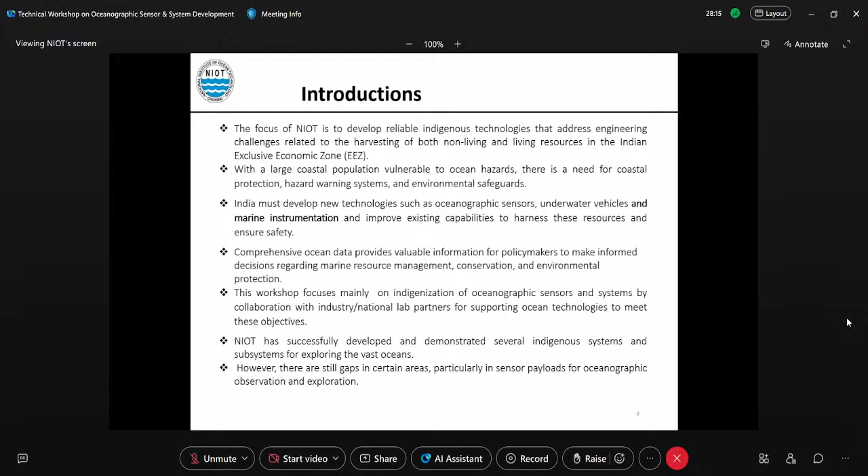NIOT has got a group called Ocean Observation System. The mandate of this group is to operate, maintain, and mount buoy observation networks, and also maintain the related telecommunication facilities in the Indian seas. This group has a network of moored buoys in the Indian Ocean around the Indian coast.

This group also, for operation and maintenance, works to develop facility for calibration and maintenance of the sensors in-house.

To support this group, we have a technical group. One is the Ocean Electronics Group. This group helps in indigenization of some deep ocean observing sensors, for instance Argo and AUPD, Autonomous Underwater Profiling Drifter, and so on.

And one more group we have is called Marine Sensor System. This group fully concentrates on development of underwater acoustic transducers and systems.

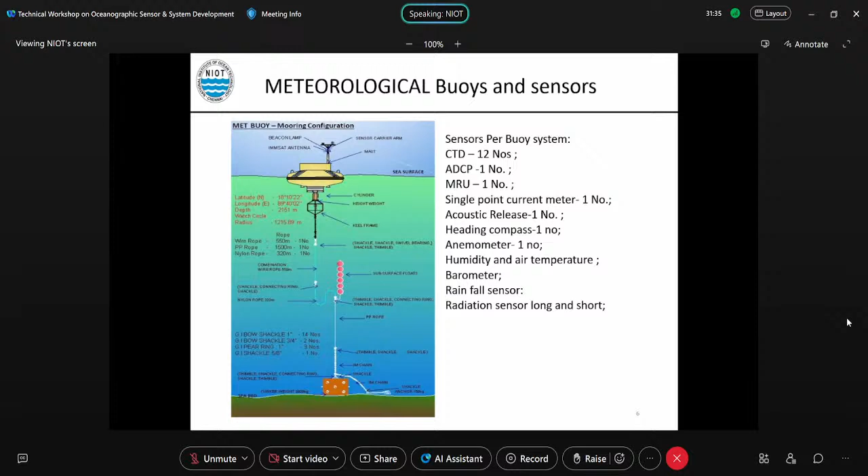Each buoy houses sensors valued at more than 3 crores. It has an anemometer, heading compass, humidity and air temperature sensor, barometer, rainfall sensor, and radiation sensor for long and short wave measurement.

We have another buoy called the Omni buoy. This buoy houses sensors for atmosphere as well as underwater, even below 500 meters depth, up to the mooring point. So in addition to meteorological data, it has CTD sensors and ADCP, Acoustic Doppler Current Profiler.

The third one is the Tsunami buoy. This buoy houses a bottom pressure recorder, and that pressure measurement is transmitted to the buoy through an acoustic link - that is, an acoustic modem collects this information and transmits the data to shore station through satellite. So this information can be immediately passed on to institutes like INCOIS for advanced warning.

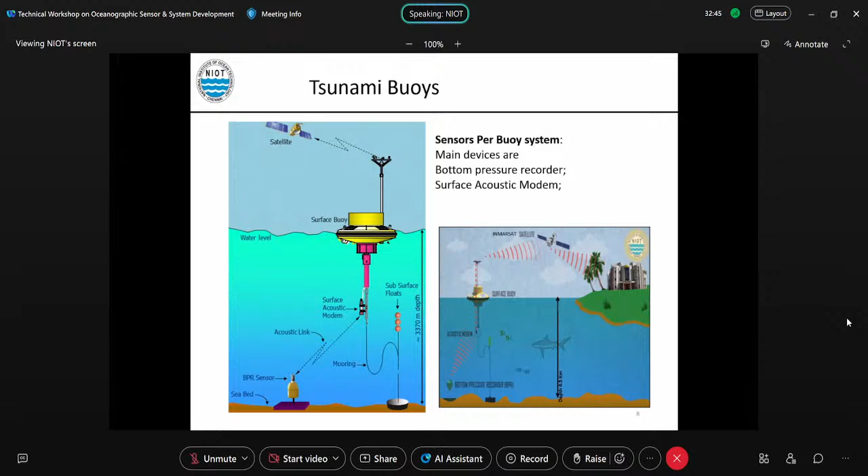Another group we have is the Marine Sensor System. This group mainly focuses on design and development of indigenous acoustic transducers and systems.

Earlier, we successfully developed an underwater acoustic transmitter of wide band and low frequency, and we got a patent for this. We also developed a hydrophone array in the same frequency range.

With this system, we developed a sub-bottom profiler designed for shallow water application. It houses the transmitter, hydrophone, and all the electronic hardware on the surface float, and we had a deck unit for real-time observation of the picture that the sonar captures from the seabed.

We have demonstrated the successful working of the system, and it is capable of penetrating up to 3 meters. We also signed a TLA, tripartite license agreement, with BEL for transfer of this technology recently. Thank you.

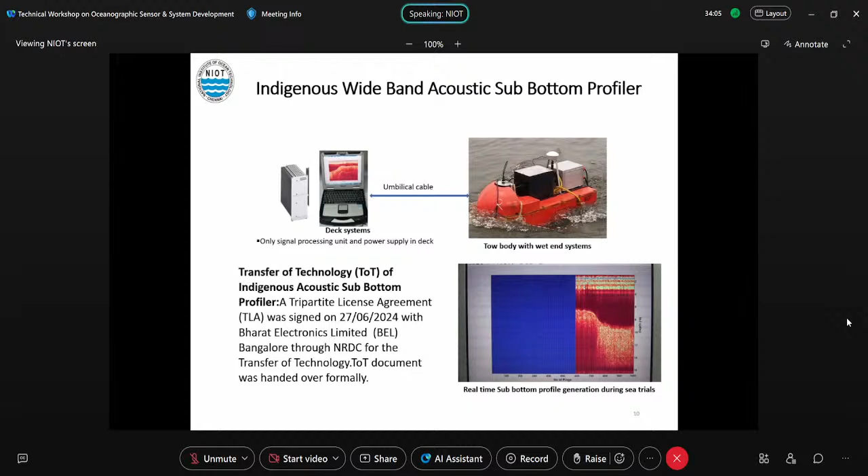This is the view of the seabed strata captured by our subbottom profiler. We manually buried some steel items in the fishing harbor channel that we could capture with the help of our subbottom profiler.

We also took our subbottom profiler across the fishing harbor channel, and we could measure the width and depth of the channel, and also see the depth of penetration in the mouth area.

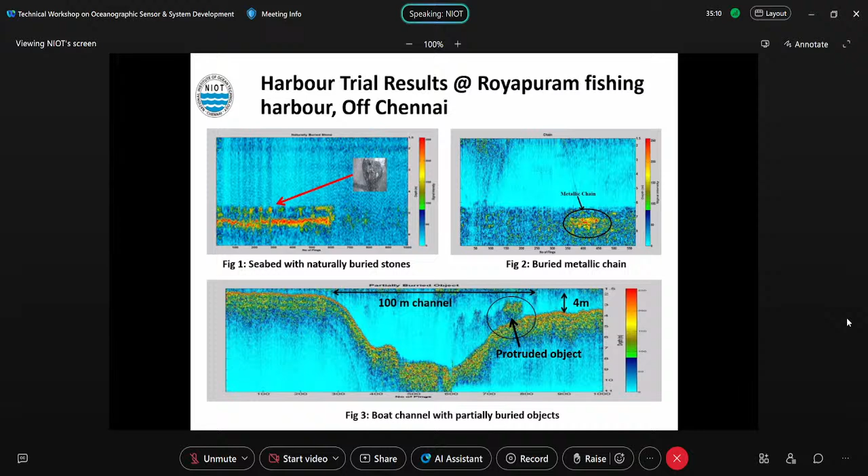Another successful product we have developed is the underwater acoustic telephone. This is being developed for manned submersibles. We have successfully demonstrated the working of the system up to 500 meters off the Bay of Bengal, and we are working further to enhance its capability beyond 500 meters, up to 6,000 meters and beyond, for manned submersibles.

We also help private industry with design and fabrication of transducers. We recently got one project for fabrication of a transducer for underwater acoustic wake seeking and homing system of torpedo for the Indian Navy.

This transducer we designed and fabricated, and we have done complete acoustic characterization and pressure testing at NIOT. We have handed it over to the firm for RC acceptance test.

So we have another 5 minutes.

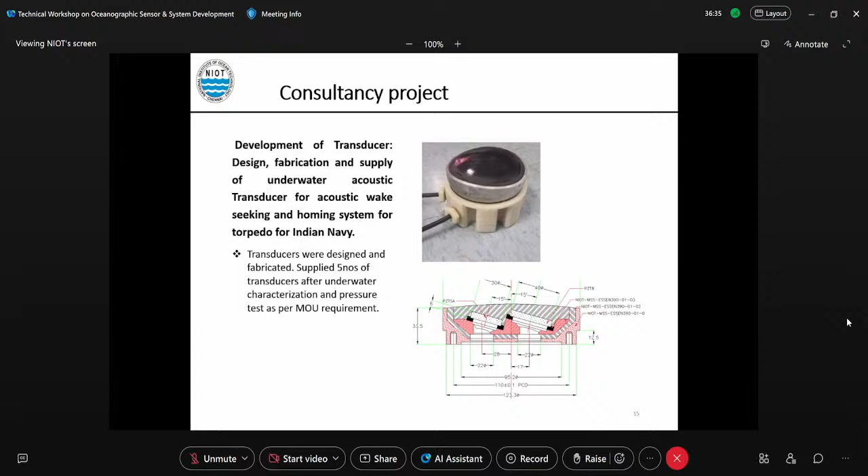We have another group, the Ocean Electronics Group. This group mainly focuses on development of deep ocean observation systems like ARGO and AUPD, Autonomous Underwater Profiler Drifter.

Whereas this water sampler has an electronic system and a pressure sensor, and from the deck we can remotely operate the solenoid valve to close the lid and collect water at the exact depth of immersion.

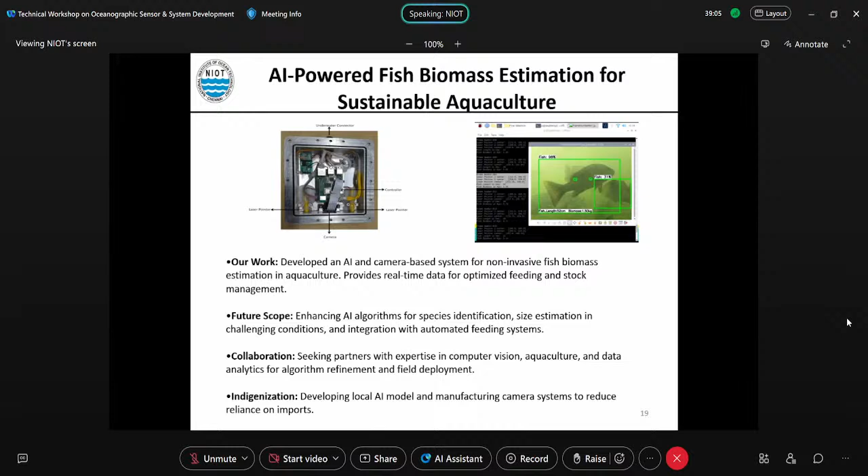This may also require changing the type of net to match various species of fish, so industrial collaboration may be required to improve and modify this fish cage system.

One of the main sensors we use for ocean observation is CTD. Usually we import this CTD sensor from Sea-Bird Electronics.

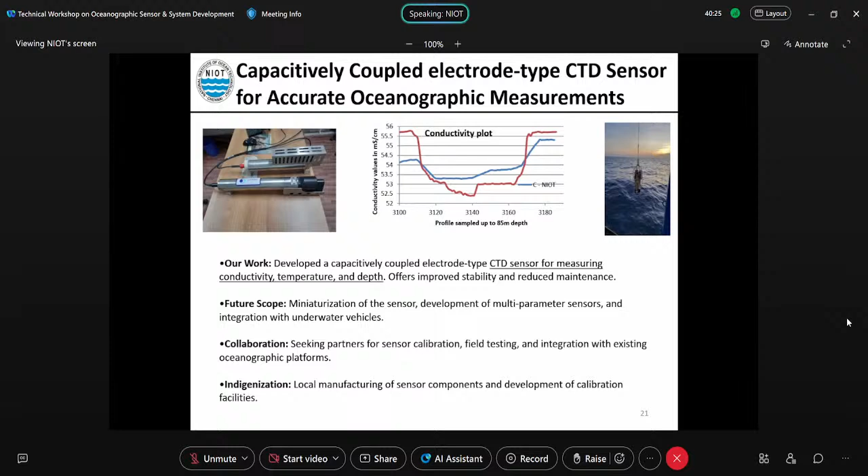We have been developing these sensors in collaboration with IIT and other institutes, and we have compared the data measured using the imported sensor and the locally made one. There are some differences, so fine-tuning work is still going on in the development of this product.

This is a low-cost CTD profiler that doesn't require the vessel to stop and operate a winch to lower it and get CTD data. This sensor can simply be thrown into the ocean, and it submerges up to a set depth, at which point a dead weight is deployed.

The dead weight will be de-linked, and once de-linked, the sensor will pop back up to the surface. During the transit, it measures all the CTD data.

Another product we have developed, under development, is AUPD, Autonomous Underwater Profiling Drifter. Once we deploy it in the sea, it moves based on the direction and speed of the ocean current, traveling from surface to deep, maybe up to 4,000 meters. During this movement, it can measure ocean parameters like conductivity, temperature, pressure, density, and salinity. The battery can support a maximum of 180 cycles, and once the AUPD comes to the surface, the data is transferred to shore stations.

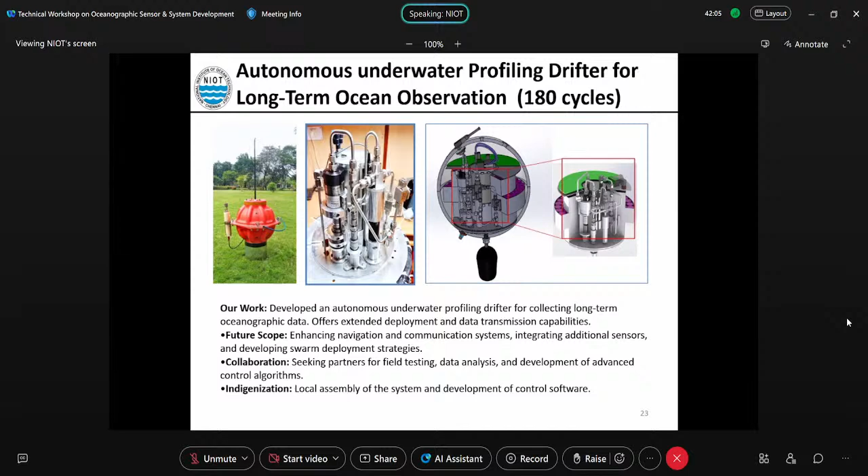We also have another product called Sea Profiler. While the ship is moving from one point to another, during the movement we can collect CTD data by connecting this to a hydrographic winch. This profiling goes from surface to deep, and the depth depends on the speed of the vessel and the speed of paying in and payout of the hydrographic winch. Based on that, we can get a profile of the CTD with this small CTD profiler.

Okay, quickly finish.

There are many sensors we have identified that are required for development of all these products. I have listed out sensors 1 to 7, required for development of the fish cage: CO2 sensor, chlorophyll sensor, dissolved oxygen sensor, arsenic sensor. There are also many other sensors like SST sensor and nitrogen dioxide sensor. We also need development of hydrophones and transmitters for underwater acoustic communication and imaging. There are so many sensors listed that require indigenization.

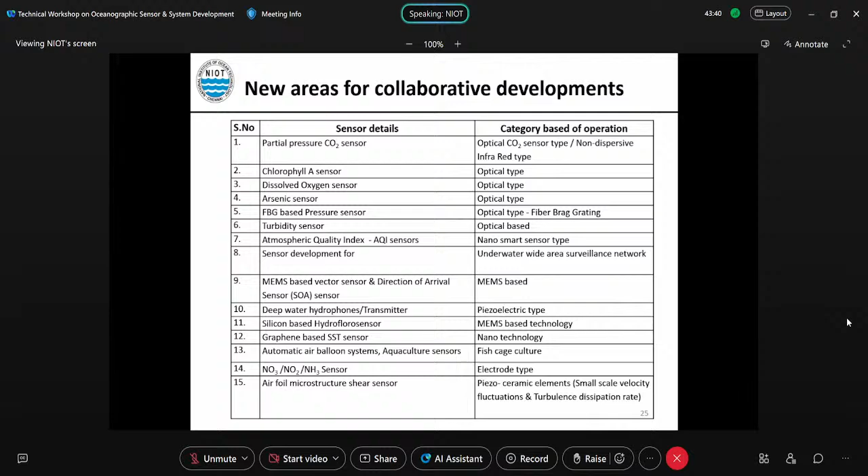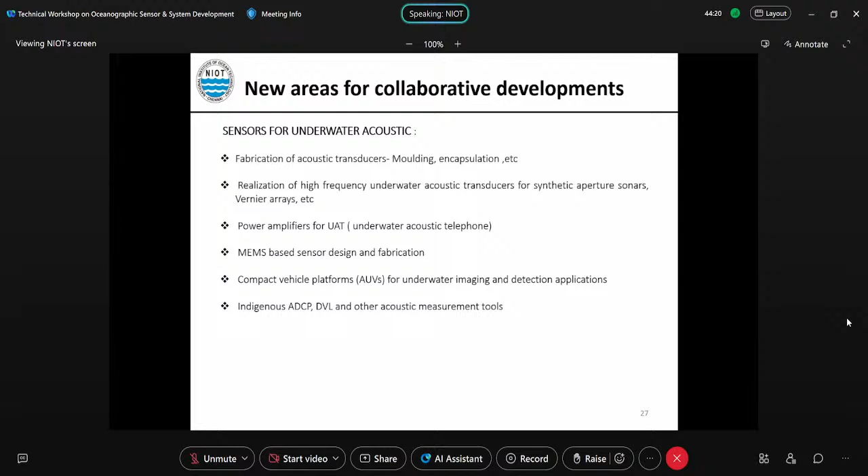These are the sensors we use for an ocean observation system. We have given complete details for the make, model, resolution, accuracy, range, and type of sensors. For the acoustic related area, we need industrial support for development of sensors like transmitters and hydrophones, requiring industry support for fabrication. For our underwater acoustic telephone, we need power amplifier development, and also development of ADCP, the acoustic Doppler current profiler. We need industry support to develop these products.

We have a facility at NIOT to support industry, since the facility may not be available everywhere. Some of the facilities we have at NIOT include research vessels to take the product to sea and test and validate it. We also have lab facilities such as an acoustic test facility, hyperbaric pressure test facility, environmental chamber, and a shaker system for shock and vibrations.

This is a view of the hyperbaric test facility. This facility helps test the product within the campus, eliminating the need to take the product to the sea and deploy it in deeper water. So within the campus, we can see whether the product developed is capable of withstanding the external hydrostatic pressure.

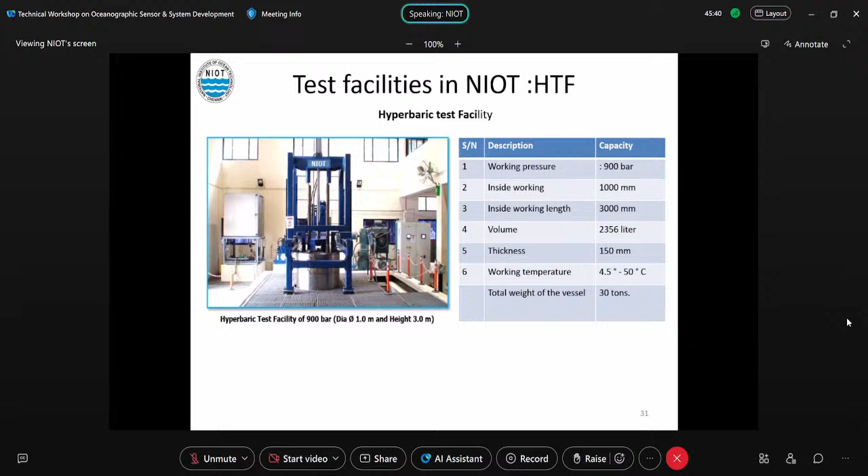We also have a corrosion testing chamber. This is to test the material's capability to withstand corrosion resistance in the marine environment.

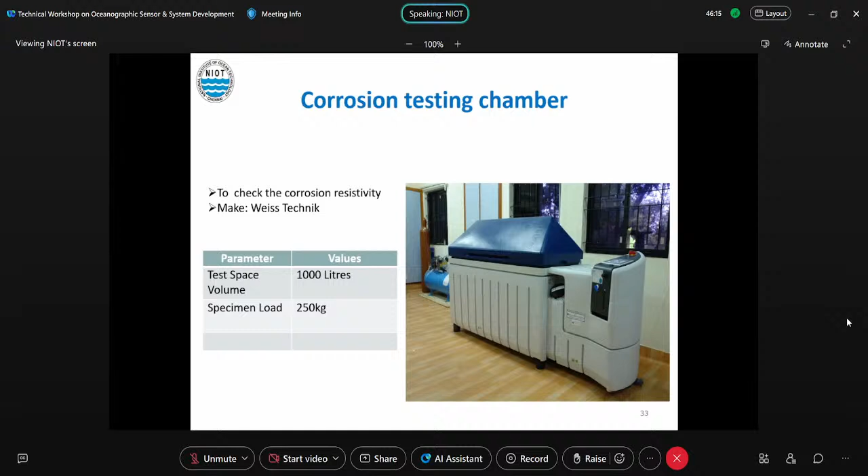So why do we need this indigenization? I have listed out a few points. One main thing is the cost of sensors imported for one buoy is about rupees 3 crores, and these sensors are very expensive with a long procurement and repair lead time. They often require recalibration at the OEM facility at specific intervals determined by the manufacturer, and the lead time for re-export and recalibration is also lengthy.

Therefore, efforts must focus on indigenization of these sensors and establishing a calibration facility that meets international standards. Thereby, we can achieve self-reliance by developing and producing sensors within the country, reducing dependence on foreign imports, boosting domestic industries, and creating employment opportunities.

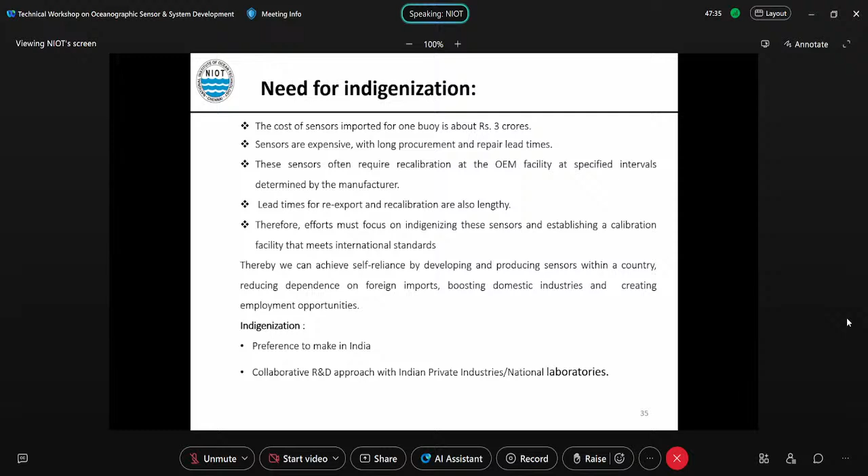This is possible since the government supports Make in India, and this can also be done through research-based collaboration; with a research-based approach we can develop these within the country.

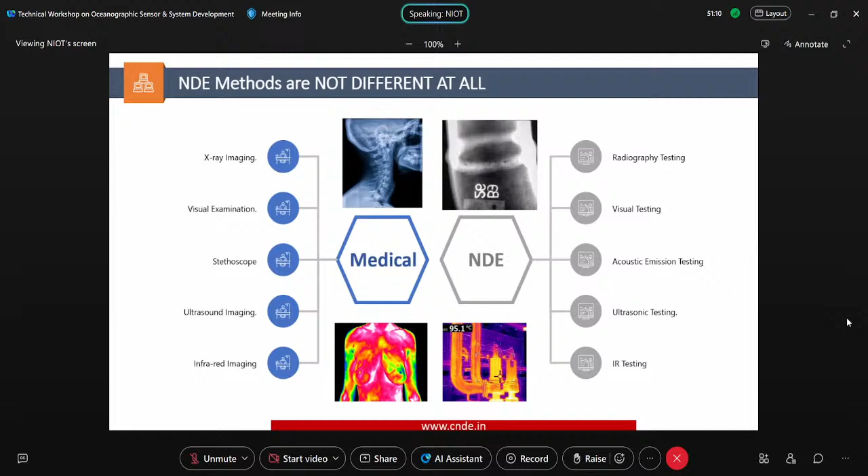Okay, so basically, NDT is something that you need because no material is manufactured perfectly. We live in an imperfect world. So no material is manufactured perfectly, no structure is manufactured perfectly. And even if you do a good job, the material doesn't stay the same, just the way human bodies do not stay the same. So just like in the human body, whether during manufacturing, production, or post-production when it's being used, you need to make sure that everything is intact and all right. And how do you do that? You do that very similar to what you do with medical. In medical, if I am not all right, I go get myself X-rayed, I get an ultrasound, an MRI. These are technologies that are used. We use identically the same technologies. Only difference is that we are probing inside material structures that are not living, and that's a major difference.

But there's a much bigger difference. Unlike human anatomy that has not changed in hundreds of years, unfortunately in the materials world, in the engineering world, materials change every year. Components and design change every year. Problem statements change every year. So by the time you are ready, and you have solved a problem, the problem has shifted. This is a huge challenge that we have.

The other big challenge is the fact that if you just talk in terms of, say, a ship, it has thousands and thousands of welds, and weld is one of the areas that we need to inspect very carefully. If you take railways, you're talking of 1 lakh kilometers of rails that I have to inspect every 3 months. Bridges, I don't have to keep going on this. So the volumes are very large, and in some cases the conditions are not very good. Underwater conditions, like this, are not as good as doing it on the ground. So that's a big challenge we also have. And finally, it's a very cost sensitive market, so you've got to do it cheaper.

So what we do at IIT Madras is we do deep research in this field. We look at how we can solve problems that are unsolved, and how we can take the physics, the mathematics, and the engineering and the technology to make things that we want to do better. We basically look at three major areas.

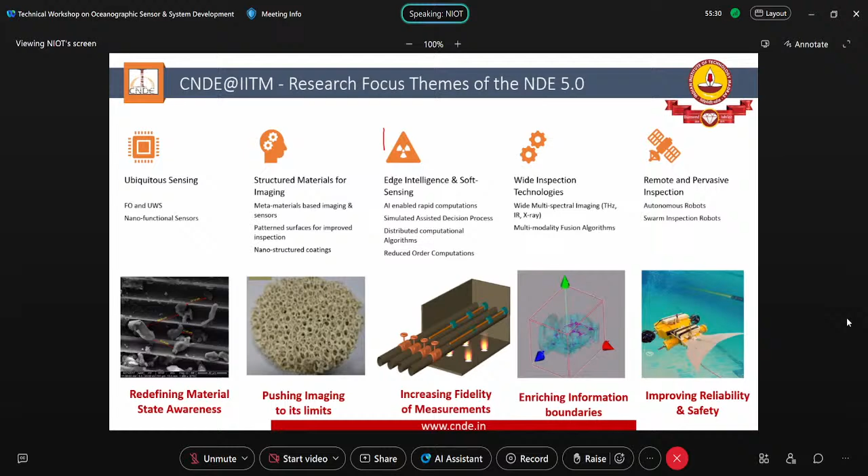And finally, we're looking at swarm robotics. Imagine you have thousands of these inspectors going around and taking data. So these are the areas that we are working on.

This is a part of my team. They're not the only team, but we have faculty from different departments working together. We do a little bit of work with the ocean department, but mostly materials, electrical, civil, and computer science also.

Extremely collaborative, we work very closely with many universities across. These are only universities which we have ongoing or recent student exchange programs, joint PhD programs, or joint funding that goes across the world. We are dependent heavily on our funding from the industry.

Whether it is manufacturing, aerospace, defense, transportation, or energy, we work very closely with the industry. And what's important is, because we work so closely with industry, it has allowed us to actually understand the problems, solve the problems, and more importantly, made sure that the problem we solved actually translates into a product—a made in India product, made not just for India but for the world. We have 13 companies that we have started in the last 15 years.

Just a small snapshot: these 13 companies are all located within 20 kilometers from this place, or even closer to IIT, and they employ about 1,200 people. That is more than what IIT employs.

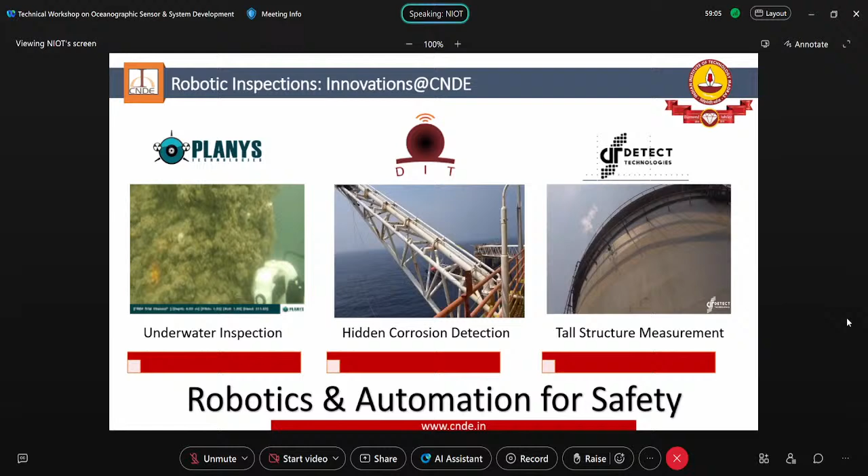Similarly, whether it is AI-based technologies for inspection—welcome to XYMA Analytics, where innovation meets industry needs. Today we introduce the UT Maps, a state-of-the-art sensor designed for precise temperature monitoring in reformer tubes. Our sensor is engineered for seamless integration into industrial furnaces, ensuring accurate and reliable temperature readings. Installing the UT Maps is straightforward, and our team ensures smooth integration with your existing furnace setup. Our technicians meticulously calibrate the sensor to meet your specific requirements, ensuring optimal performance right from the start.

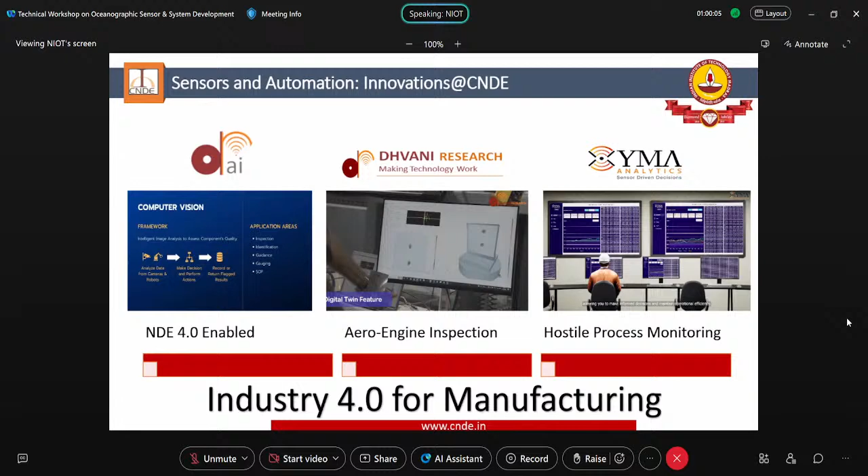Should temperatures approach or exceed the safety threshold, the UT Maps triggers an immediate alert. This alert system ensures swift action, minimizing risks and maximizing productivity in your industrial processes. Experience the power of real-time monitoring with the UT Maps. Contact us today to elevate your industrial operations to new heights.

Lovely, and then it is accepted and works every time. Whenever it's asked to work, it will work. In the lab, it will work only when the person is there, and then he will also have to do some soldering and tinkering to make it work. That is the difference, right? So that, and then of course, understanding the business perspective.

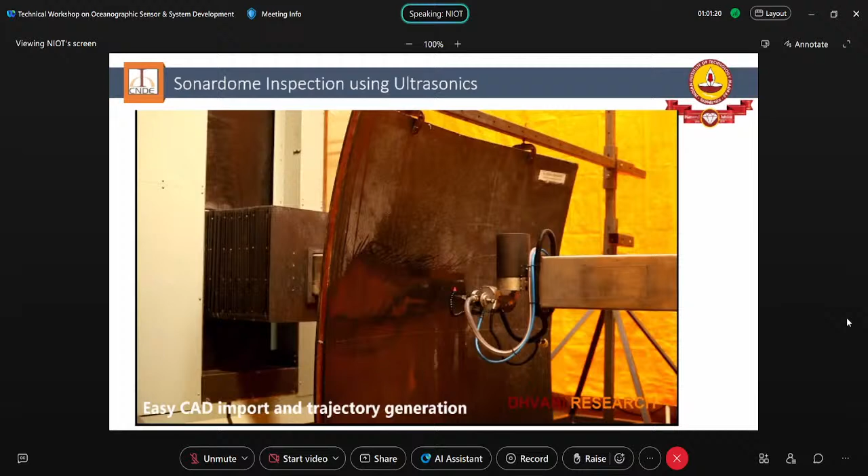Those are issues relevant to some of your things. For instance, Dhvani Research, located a few kilometers from here—let me show you. This is actually a sonar. It depends on this—this is the largest ever built. And the water section can be 6 meters, 3 meters by 4 meters. That will be the volume of material.

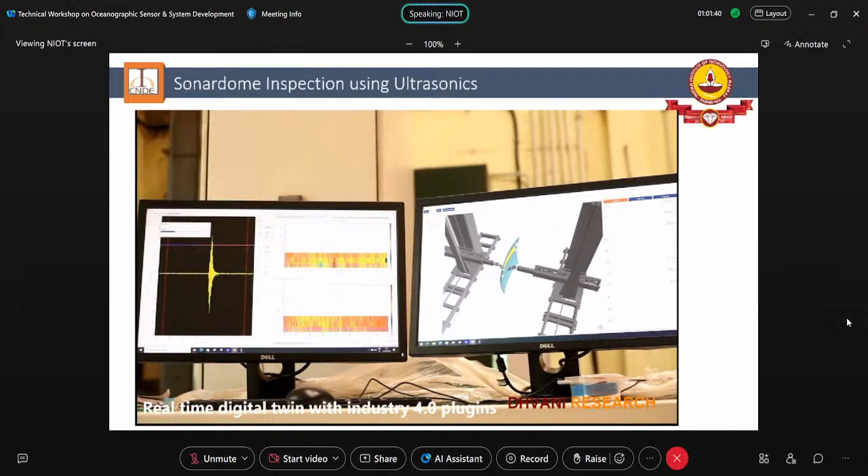It can be composite, so that is one section of the sonar dome, which covers the sonar under the ship. That is a much more complicated job than that. More importantly, what we are also providing, and nobody else is able to do, is a complete digital twin—whatever I do in the computer reflects reality, and whatever happens in reality comes back. That is a feature that didn't exist before we introduced it. Now others are doing it.

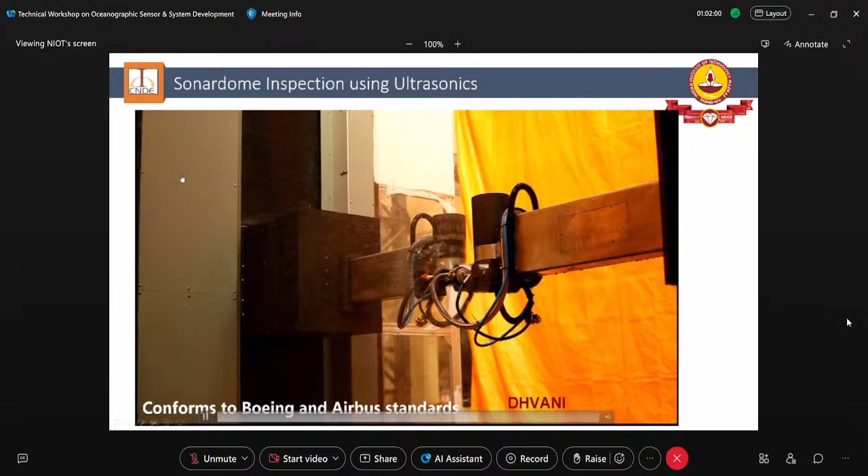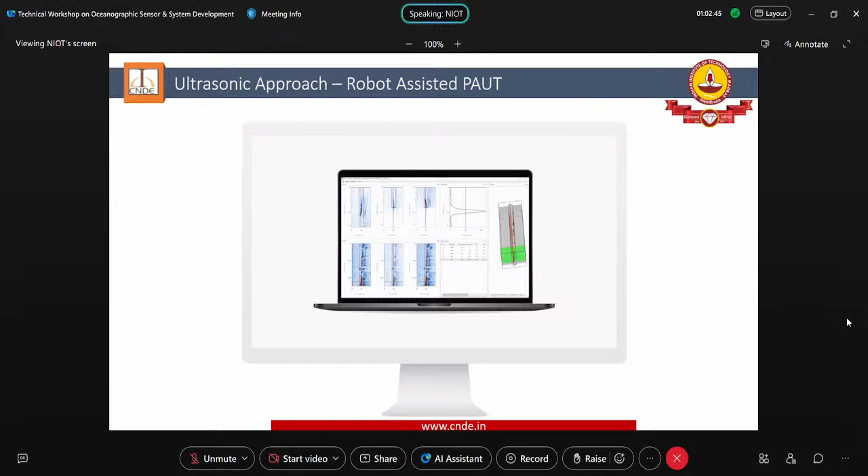Another example is work we did with Mazagon Docks initially. Today everybody, like L&T and Reliance, is trying to use this—weld inspection that is completely automated and robotized. Unlike a common situation where you need experts to look at inspection, we are able to get rid of that expertise and make very informed decisions using automation and AI. Today companies like L&T and shipbuilding companies are using our weld inspection hardware and software, with very limited requirement for the kind of expertise normally needed. So they can improve productivity and reliability.

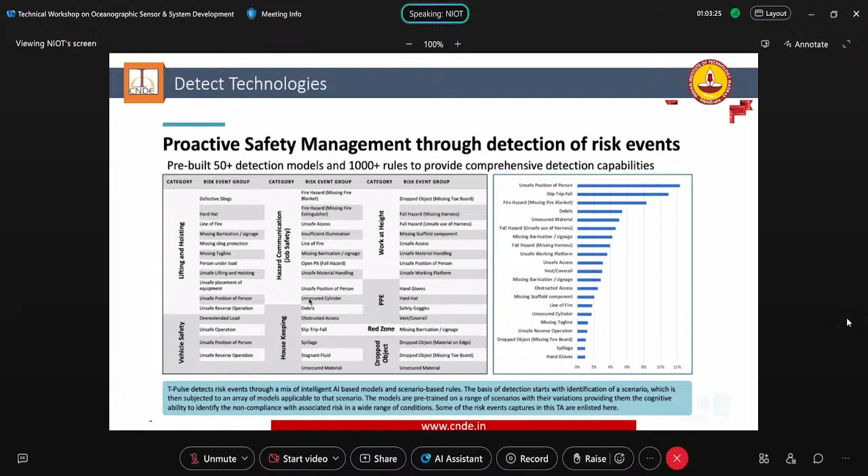Another company, Detect Technologies, today operates in several areas—this company alone constitutes 50% of the employment I talked about earlier. We employ about 600 people globally. They look at building intelligence into any manufacturing facility, wherein both compliance and safety are automated using AI. This just gives you a list of the various AI models they have that allow them to make places safer and more efficient.

Similarly, another company called Maximum Labs contributes an interesting ERP for shutdown periods, which makes processes more efficient during shutdown. And finally, a company called XYMA Analytics, which came out in 2020, looks at creating an IoT platform for hostile environments, particularly for marine environments. I want to just say this.

This is an example of providing complete monitoring of the engine, whether it's thermal mapping, vibration mapping, or oil quality - all continuously monitored. So an IoT platform for the engine room for marine is something we are now offering. They're commercially coming out with a couple of partners, user industry on the marine side, so you can monitor the engine and make sure it's being efficiently used.

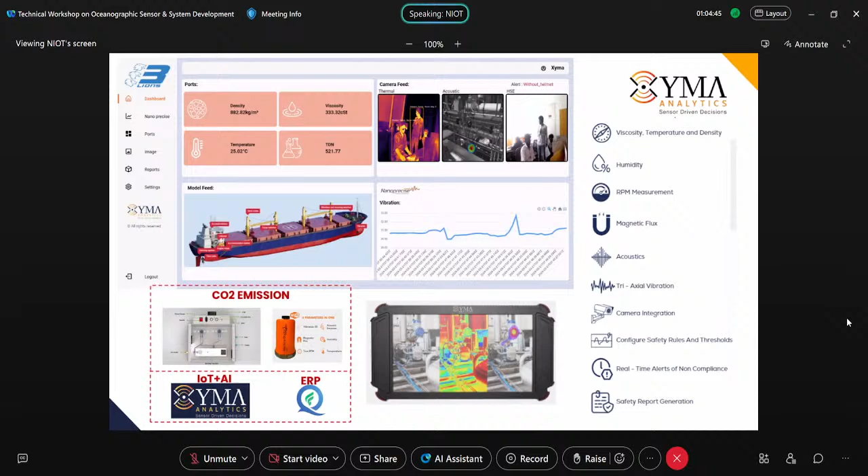Finally, last story - we are not just about engineering, we are also about social responsibility. One of our companies is using robotics to solve a couple of very important problems. One is the last mile water - your last mile pipeline is your biggest issue with water. Sometimes you open the tap and get brown colored water, and you don't know what is in it. So we are trying to look and see if we can fix that.

We're now operating in about 15 cities in India, trying to make sure that the water pipelines are safer. Just one example: in Hubli, about a year ago, after our intervention, 10,000 homes got clean water the next day, because we found exactly where the problem was.

Similarly, with septic tank cleaning, we are trying to solve the problem that you and I have made happen - the fact that you make people go into the septic tank. We have now completely robotized it, and there are quite a few changes we are making.

With that, I'll stop right now. I don't want to delay this, but thank you so much for the opportunity. The message is very simple: we have technologists, good researchers, amazing facilities, great ideas, no dearth of talent, no dearth of opportunity. How do we take that? How do you take what you have in your lab and make an impact?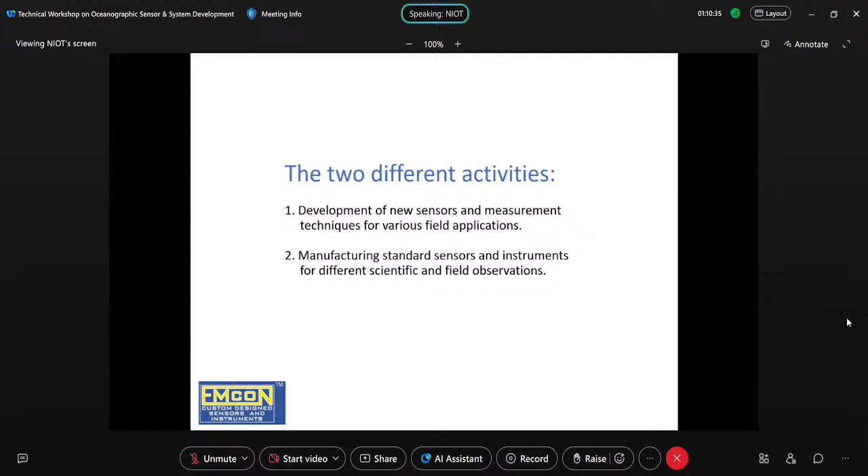These are the areas: agricultural science, post-harvest technology, marine science, ocean technology, fish processing, fishing technology, water resource management, dam safety, architectural and structural engineering, hydrodynamic model studies.

All our technology is fully indigenous, so we don't have to depend on any other foreign body. That is our core idea.

So when we design something, we understand the location and then we design accordingly. It's not just doing something and making sure it goes into any situation - it won't work like that. For each different type of situation, we have to design, find the range, find the type of product, find the type of material to be used, and a lot of other things.

Most of our products have been tested at FCRI Palakkad, IMD Pune, CWPRS Pune, IIT Chennai, STIC. This I am skipping because it may not be relevant.

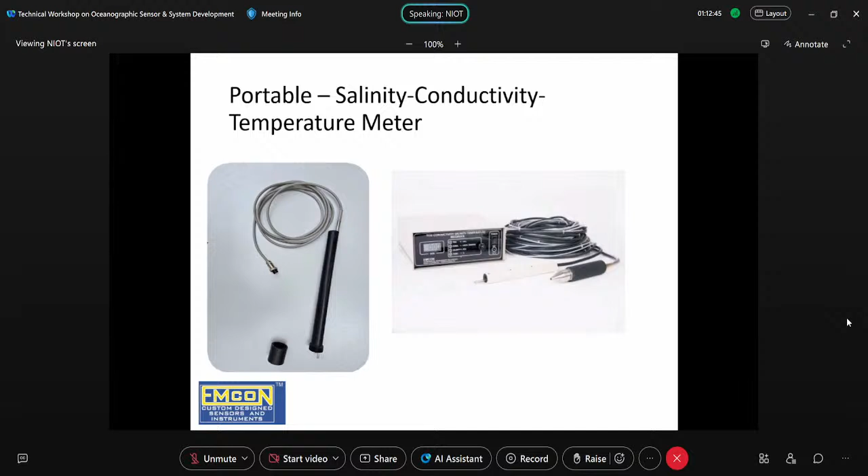Recently we have developed this for DRDO for their XBT probes, expendable temperature probes, and CTDs also. This is our most simple probe, which somebody can take and dip the sensor to the required water body and take measurements. This is a portable model. There are also other sensors connected to a handheld device for dissolved oxygen, ORP, conductivity, and temperature.

Now this is another work we have just started. We are planning to come out with a capacitance-based sensor for measuring conductivity, I mean salinity. We have done some initial tests and found very good results. There are a lot of further activities to be done, but it is a promising area. Using capacitance, we can directly measure salinity.

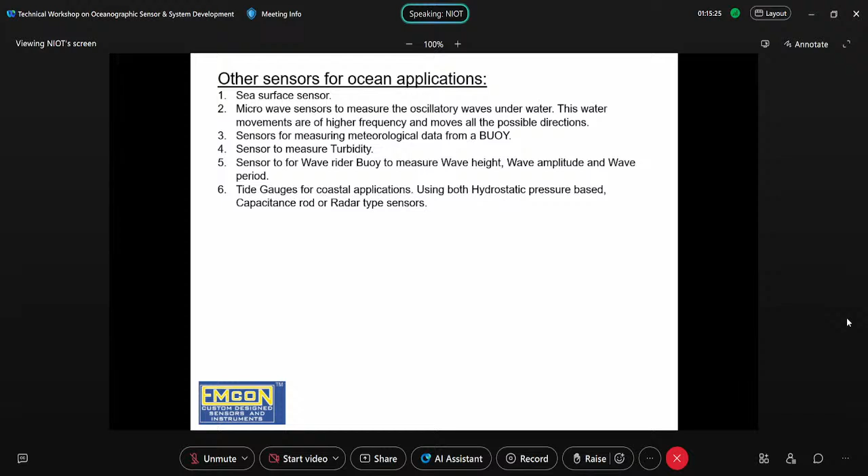This is another product which was designed for Adani port. This is how we come into picture - people come and say that I need to measure this thing. Now this is a typical case. In Adani, when the port was developed, it is a coastal port, you know about it. A lot of sand is being taken away, and during construction, a lot of sediments are again being deposited. This happens in a very coastal line where you cannot do ultrasonic profiling.

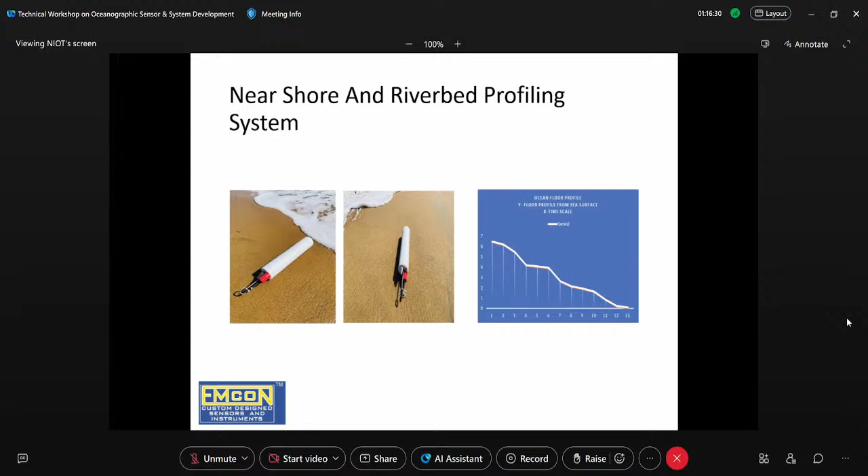So they wanted to know how much soil is being taken away and how much sediment is getting deposited. We designed a new sensor which can be dragged from the shore, and it gives a very good profile of what's below the water. The cost is also just 2 to 3 lakh only. These are current meters which will be used in the ocean, which give velocity, depth, and direction of current. These are tide gauges, different models.

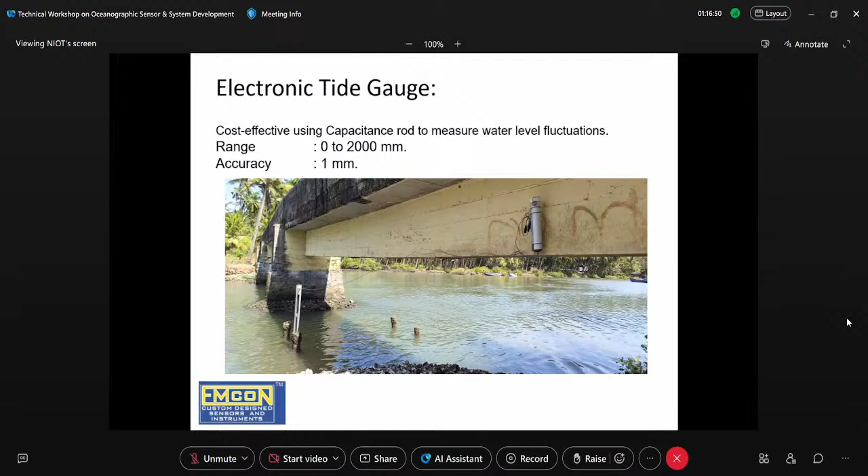This is another product we recently launched to measure silt in water. In fact, there is no sensor to measure silt in water as such, so we have been using an inductive sensor which measures density. When suspended particles in water create a change in density, it's very small. So we have designed a sensor which will take a sample, do the measurement, and release it back. These sensors are used by soil conservation research institutes throughout the country.

This is for measuring sediments in rivers or water bodies. This is basically a weighing scale which can be immersed in water. That's all, to be very simple.

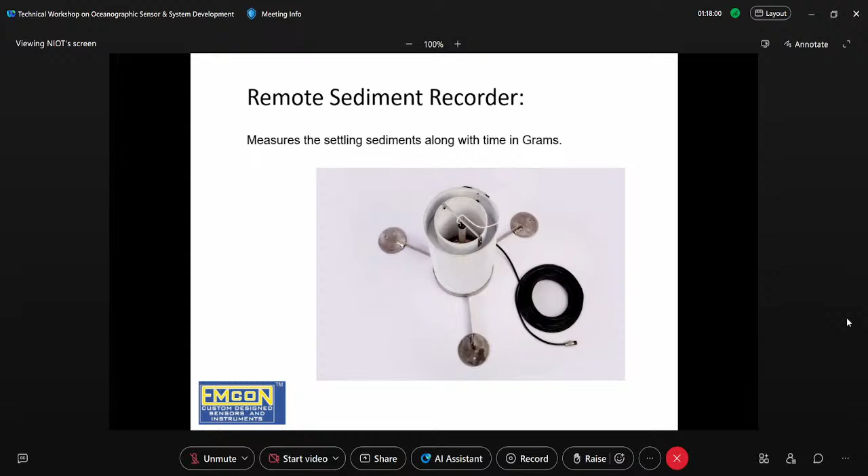We do pressure testing, mainly for ocean applications. It will be pressure testing and comparing data with some known products. For conductivity, we did tests with Seabird as well as RBR.

Most of the tests were done in NPOL, including the entire pressure test and sea testing. About 10-15 sea trials were conducted.

Is there any validation test you did for your conductivity sensors? Any graph you have now? Right now I don't have, but I can share. We have done around 10 to 15 sea trials with Seabird as well as RBR.

You were showing some wind sensors, no? Is it marine grade? The one which I showed you is for land application, but we have marine kind of sensors.

So is it being used now? Yes, it is being used by CUSAT as well as Andhra University in the Bay of Bengal side. Wind sensor is...

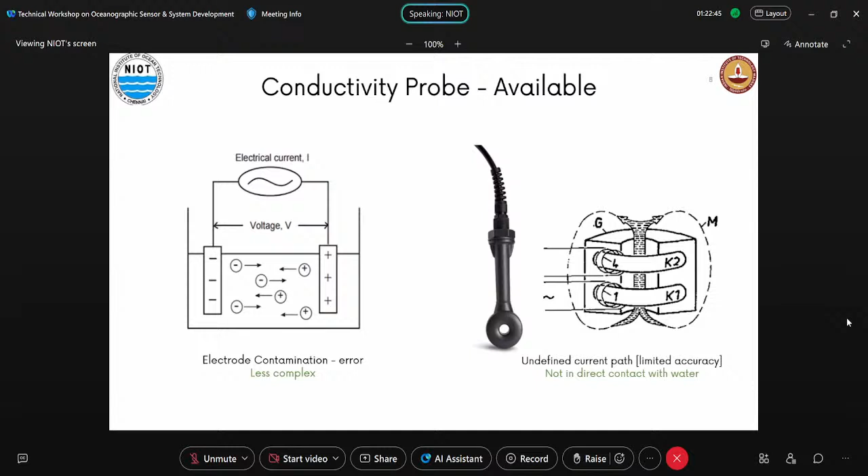I can send a current, apply a voltage, and measure the current, looking at the voltage drop there. But then there will be current going through the water also, since this is immersion type. How do you stop that? I have another electrode in that corner, which is connected to ground, so most of this current will go to ground.

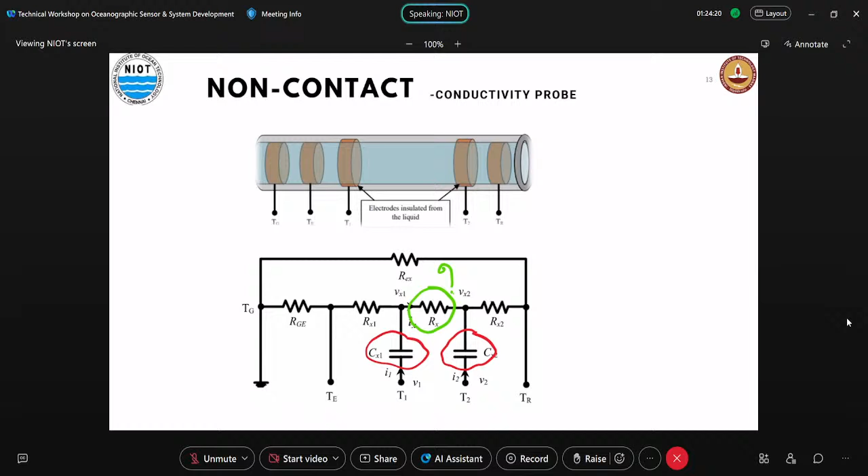So we came up with an electronic scheme where you inject some current - this is the electrical equivalent circuit, and these are the two capacitors I mentioned. These two terminals are available to us. We are automatically adjusting these voltages so that this voltage equals this voltage. I don't need to explain how that is achieved now. Once that is done, there is no current through this, so at that time I can just measure these two voltages.

I know the voltage across this, I know the current going through this, I know the dimensions, so conductivity can be directly calculated. That was the actual idea. Now, if you look at it, the sensitive electrodes are not seeing water. The magnetic mechanism, which is heavy and has non-linearity, is not used in this. So there are a lot of benefits.

I've mentioned that already, but now we were a little more greedy. I've shown that these electrodes are exposed to water. In case the water is a corrosive fluid, not just seawater, we may not see the electrode after some time - it may get corroded. So can I avoid them?

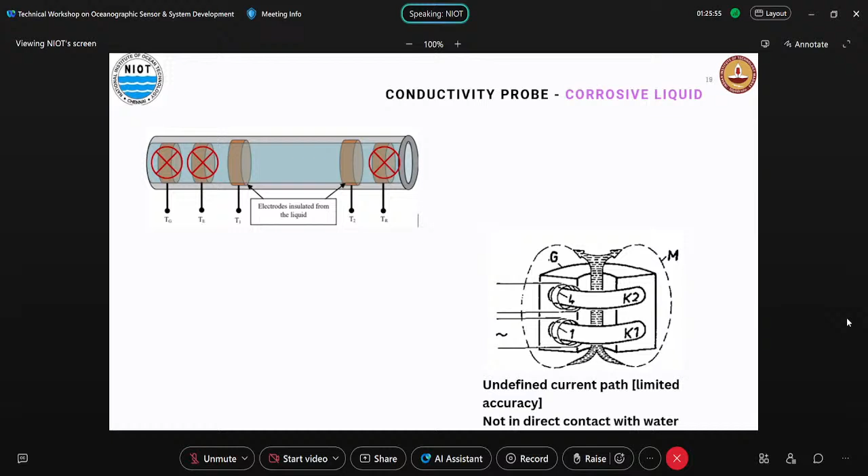So what we have done is a marriage between this and the inductive mechanism. I used one of those coils to send current through, and another coil to measure the current through that, so I know the current flowing. This mechanism means the coils are not exposed to water, so there's no contamination or other issues. The only problem was the undefined current path. Now I have the defined current path - this is the mechanism where you use one coil to send current and another to measure it.

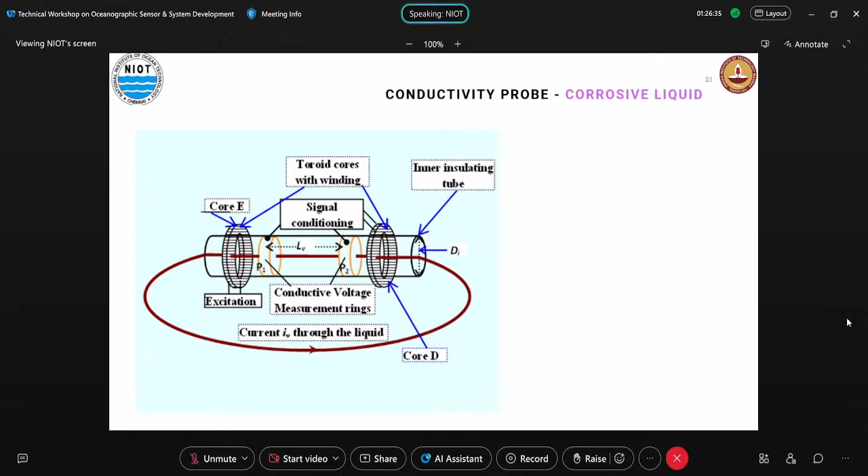And measure the voltage drop here. So you know the current, you know the voltage, and the conductivity can be straight away calculated. Although it looks very straightforward, it is not that straightforward - we will need a little bit of electronics.

Again, I think now you may not be in a mood to look at this, but this is the water column. You are injecting some current, so there is current going through that, which induces some voltage in this. I get a corresponding output which gives the current flowing to the water column. That current induces some voltage, or there is a voltage drop corresponding to that.

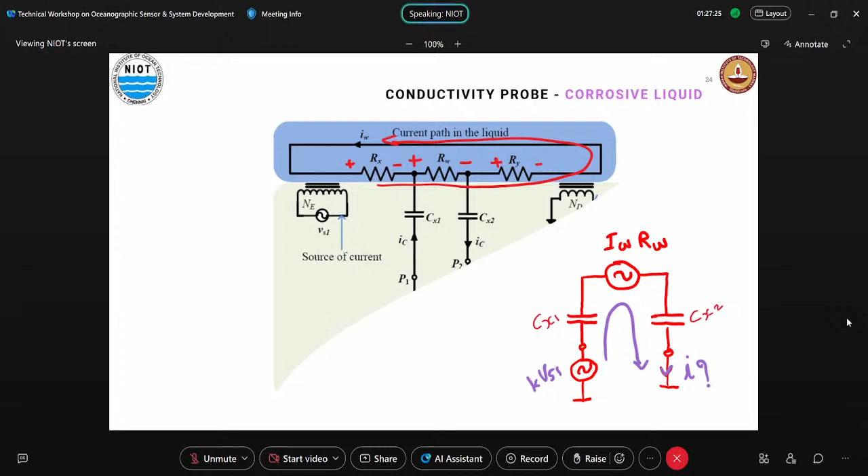Now I can simplify the electrical equivalent circuit like this. It is coupled through two capacitors. You have another voltage which is in phase with this, so that current will have information about IW, RW. Only thing is, the output has information about RW, but at the same time it's also sensitive to the value of these capacitors - if that changes, the output will change.

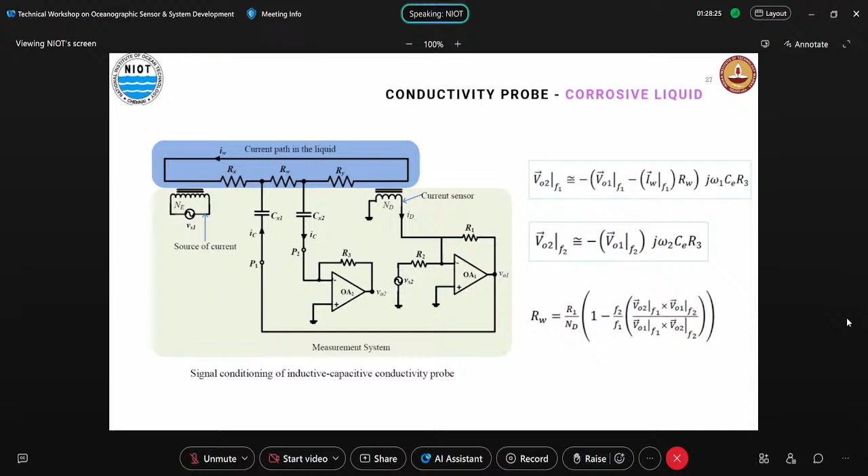So we made further improvement where I inject another voltage at a different frequency through the same circuit, measure these capacitance values, and correct for it. From there, I can calculate the value RW just based on those two measurements. So this is fully non-contact - you're not exposing any electrode or coil to water, and it's fully calculable. That is how we got very good accuracy.

There are mechanisms already available, but when you have, let's say, a thick pipe - one of the ways, if it's a metallic particle and you have a coil, the inductance of that coil will change. This mechanism is well known. But when you have high pressure tubes, they will be thick, and if you put a coil surrounding that, you may not see anything.

So we came up with a mechanism where we have two coils - one is outside, while there is another coil inside the tube. But I don't make any electrical connection to that; they are just magnetically coupled. We have shown that I measure from here, these things are in the tube, and we looked at the phase - the phase has that information because that phase change is quite sensitive.

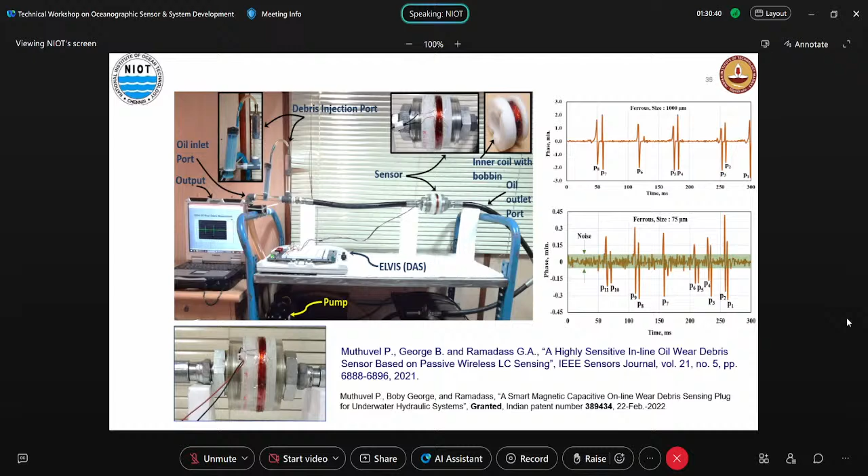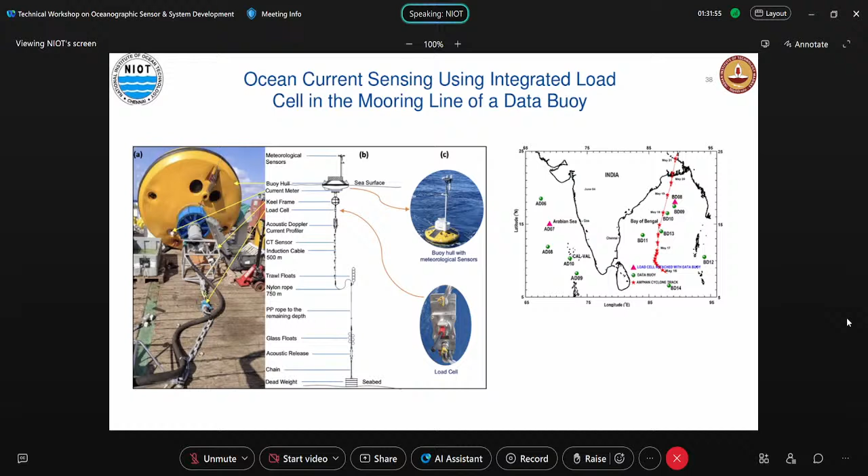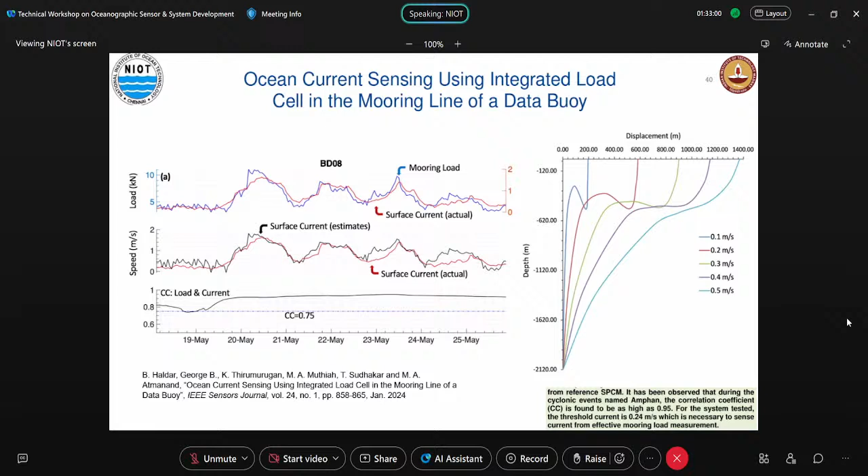So these are brief descriptions of some of the work we have done. These are the team members: for the conductivity meter, Srini and Tata Sudhakar, Professor Jagdish Kumar, and Tejaswini, who was a PhD scholar. Muthuvel was doing his PhD at that time, and Ramdas sir was there for particle measurement. Now for current measurement, we have a team, and Vishwajit is doing his PhD on this topic. Thank you.

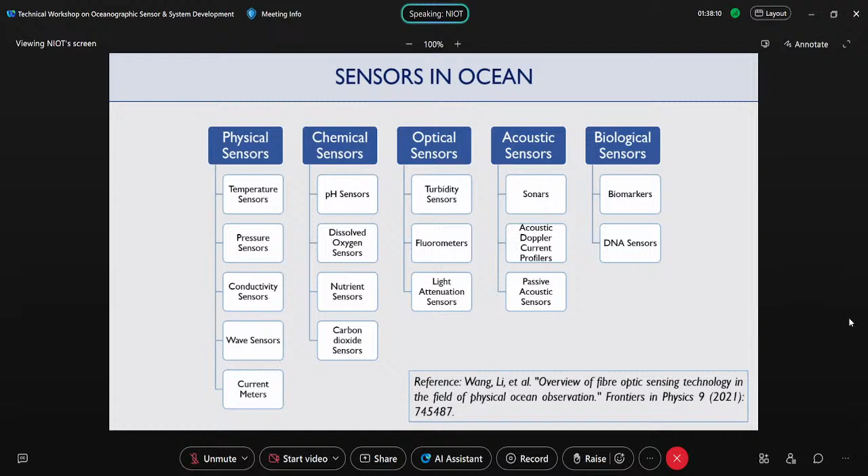This institute will know a better background to the importance of ocean than me, but I will still say that ocean observation technology is the forerunner for the development of marine science, which is an important symbol for a country's comprehensive national power, among other things.

So there are mostly electronic sensors which are used, which have high accuracy and wide predictability, but there are certain challenges also to electronic sensors - they're more expensive, sometimes large, they are susceptible to electromagnetic interference, which is a major drawback, and they are not applicable for surface and micro-nanoscale seawater detection.

So coming to that, why we have fiber optic sensors - we use them not to replace electronic sensors, but in conjunction with electronic sensors.

Some of the shortcomings can be addressed because fiber optic sensors are highly sensitive, they have high temperature resistance, there is ease of multiplexing - in a single system, single fiber, a number of sensors can be embedded, so the amount of cabling involved is reduced comprehensively. It's also low signal loss in fiber optic cables. One major advantage is resistance to external electromagnetic interference and robustness in harsh environments. Because it is a passive sensor, it can give stable measurements over a long period of time.

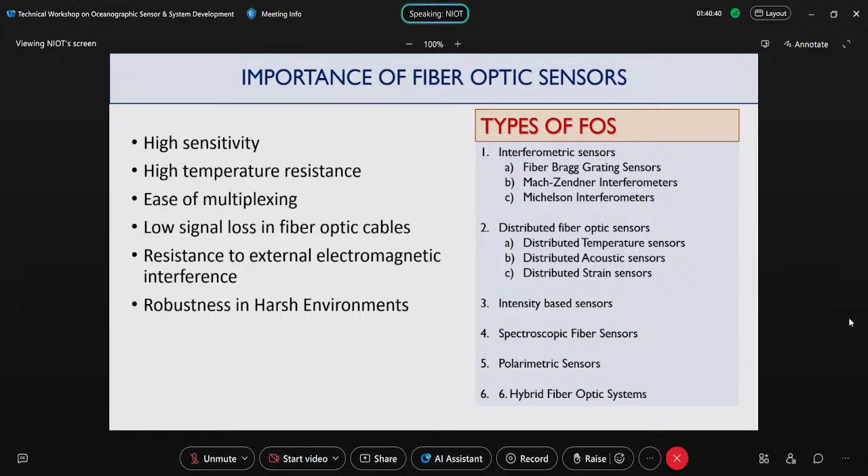In the interferometric sensors, what we do - they are point sensors. So we have a single sensor and we can have an array of sensors. Whereas in a distributed fiber optic sensor, we have a single fiber optic sensor and the fiber can sense at each and every point, so the whole fiber is a sensor itself. There are also intensity-based sensors, spectroscopic-based sensors, polarimetric sensors, and hybrid fiber optic systems. We can use one in conjunction with the other to bring out a more comprehensive system.

Fiber Bragg grating technology is basically based on Bragg's law. In a fiber, there is a certain amount of imperfection. The light wave will go through the fiber and some of the wavelength will reflect back - this is called the Bragg wavelength. This reflected wavelength is something which we measure. We are not interested in what is transmitted. Only a narrow part of the wavelength will be reflected, which we measure.

So here we can say - this one is the incident spectrum. Now when it is going inside the fiber, this is the transmitted one, and this is the reflected spectrum.

Now this Bragg wavelength is sensitive to strain and temperature. Whenever it is attached to a mother structure - a parent structure - and that structure is strained or there is a temperature change, there will be a shift in the wavelength. We can interrogate this wavelength shift and correlate it with the amount of strain or temperature change that is there, and this is how we measure physical quantities.

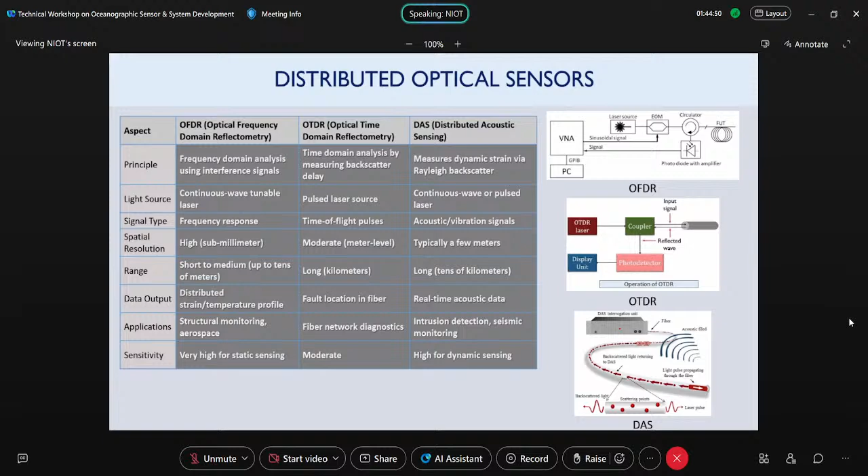If anyone is interested, we can discuss. We have developed all these prototype systems in the lab. The laboratory prototype is there, but we have not yet commercialized it, or utilized it with any industry or academic partner. So I won't go into this detail.

Another thing which is very interesting, and we are very interested in developing, is the DAS technology used for seismic sensors—distributed acoustic sensing, as we said. There is a study going on in the US using dark fibers.

In the seabed, for optical communication, there are many fibers—some are active and some are not. The ones which are not active are called dark fibers. So what they're doing is using perturbations in the dark fibers by sending sound into them, and with the perturbations they are able to detect seismicity, the sea floor seismicity, with the sensors.

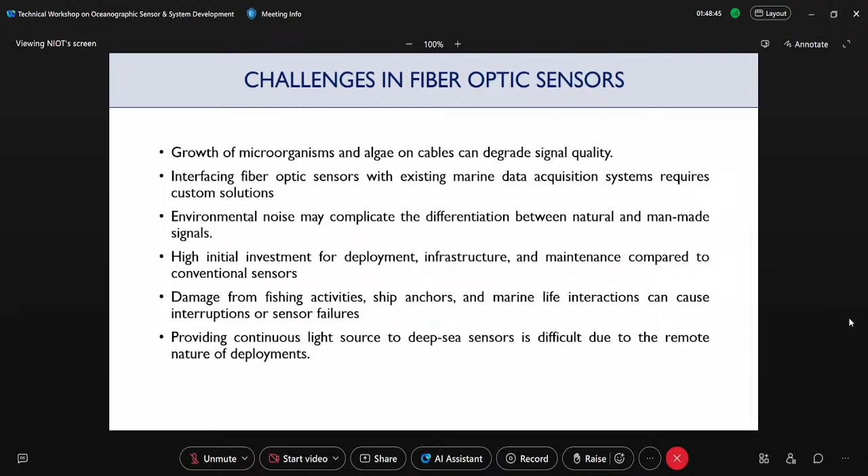We have a mission with NIOT, the Deep Ocean Mission, and we are working on that. We had proposed certain sensors like wave sensor, depth sensor, temperature sensor, salinity, tsunami, and air humidity sensors, out of which 4 sensors we are currently working on: wave sensor, depth sensor, temperature sensor, and air humidity sensor. The first 3 are fiber optic sensors, and the last one is the electronic sensor.

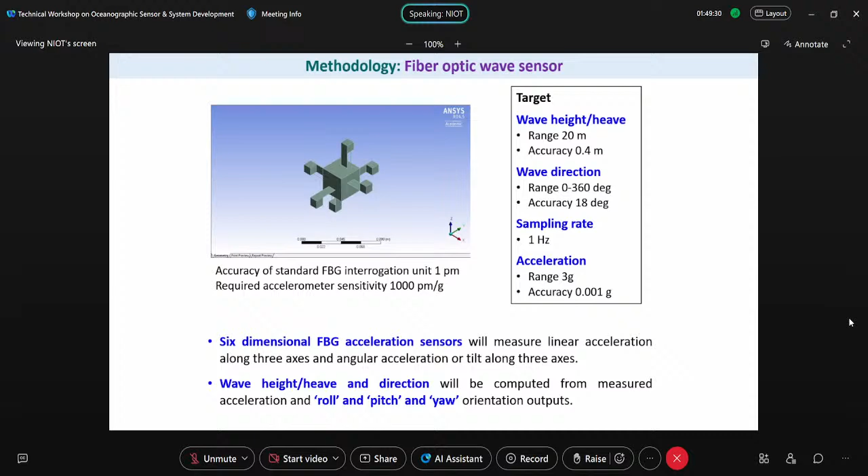So this is what we had proposed. This is the fiber optic wave sensor. Basically it is a vibration triaxial vibration sensor, and we have customized a design. We are proposing that we will customize the design according to the range and the accuracy. It's a 6-dimensional fiber optic FBG accelerometer.

Next is the temperature and depth sensor, like everyone is talking about, which is a very, very important sensor. And we are providing a fiber optic solution to that. Again, because it is a passive sensor, it has stable measurements and it does not have electromagnetic interference. So these are the key points.

This is salinity and conductivity. Here we are using a coating-based sensor. The fiber Bragg grating is sensitive to changes in strain, and also sensitive to changes in refractive index. I'll take just 2 minutes more. Because of that, if we change the coating of the sensor in which the fiber is housed, the refractive index changes according to the salinity amount. So that is the principle on which this salinity sensor will work.

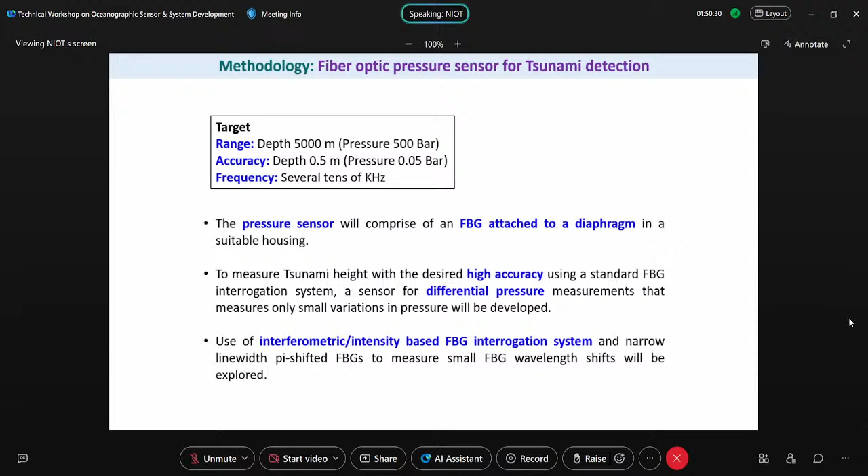Next is the pressure sensor for the tsunami sensor, which we had proposed. Fiber optic pressure sensor - I think one of the areas which NIOT is keen to work on. And another is the air humidity sensor, which is already an electronic sensor.

Okay, so these are the objectives I have already mentioned. The status of the work is that the design of the wave sensor and the temperature sensor is completed. We are going to fabricate it. For the air humidity sensor, it is ready - the fabrication is ready, but the stability test in a corrosive environment needs to be done. Other things I'm not going into.

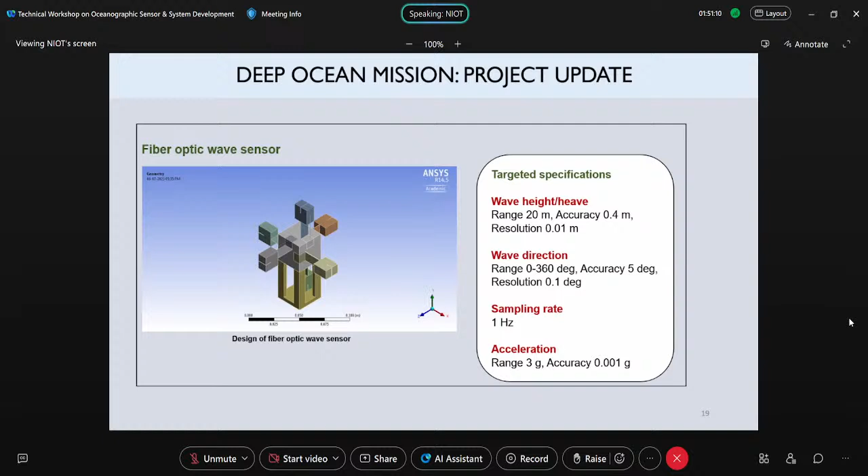So this is the final current status of the sensors, the design. This is the wave sensor. This is the depth sensor, and the air humidity sensor, which again is dependent on the capacitance.

Future collaborations include the tsunami sensor, which is basically fiber optic pressure sensors, and the moisture sensor, where instead of electronic we can also have a fiber optic alternative. A biosensor can work because if we replace the coating, we can achieve that. Dissolved gases and seismic sensors - we are already making a hydrogen sensor in the hydrogen mission project, so dissolved gases is something we have the capability for and can work on. And seismic sensors, like we said, for the DAS.

In addition to this, there are some things I wanted to point out. We are already addressing the vast difference between the prototype and the production, like Sir had said. We have an ecosystem with a center of excellence with MeitY, the Ministry of Electronics and IT. With them, we are making a center of excellence where we will train small scale manufacturers to make certain sensors. For now, the sensors are pressure sensors, tilt sensors, and vibration sensors, but we can obviously extend into more.

Second, another thing NIOT is working on is the buoys. CGCRI, not the Fiber Optics Division but CGCRI, has the capability for ceramic buoys, which can be customized at different lengths and depths. That can be one area for collaboration. I hope I could clarify and delve upon the future collaborations, which is the objective of this workshop. Thank you very much.

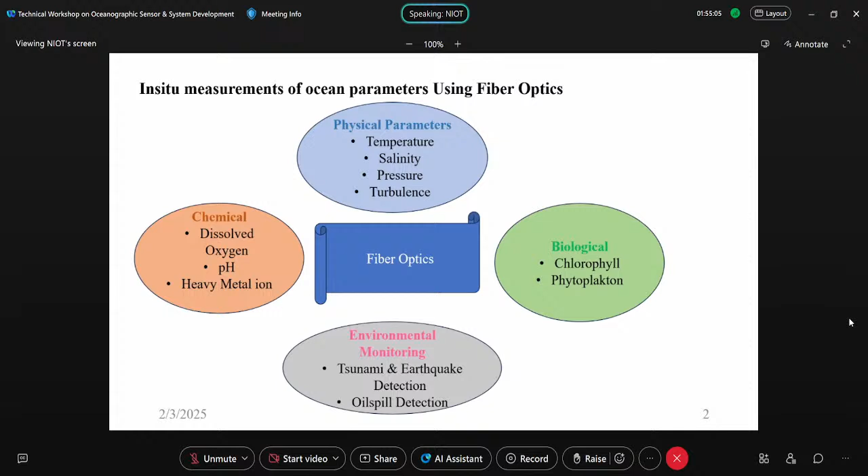As to the advancement in optoelectronic devices, fiber optic sensors are now the frontier in the field of sensing. Fiber optic sensors are used in many applications. I have just listed out the fiber optics which can be used for the physical, chemical, and biological parameters, in situ with oceans.

The basic principle, as we all know, fiber optics, here we are using optical fiber to carry the light signals. The basic idea of fiber optical sensing is to modulate the light properties. For example, by modulating the intensity, phase, or the wavelength of the light, we can measure the parameters to be monitored. So for this, the basic components we need are an optical source, the sensor, and the detection system.

One more beauty of this optical fiber sensor is we can monitor the parameters either in reflective mode or in transmitting mode. So by monitoring the reflecting signal or transmitting signal, one can measure the parameters.

As ma'am said, optical sensors are immune to electromagnetic interference. They are passive in nature, very small in size, and can be used for remote operation. We can use optical fiber sensors because of their multiplexing nature, for a wide range of physical and chemical parameters.

It is also possible to make use of a fiber optical sensor as a point sensor or as a distributed sensor. If you want to measure a range of parameters like temperature, salinity, or other chemicals, we can make it a sensor in a single fiber. Particularly with the help of FBG, it's very easy when we go for a single configuration. One more advantage with respect to fiber optical sensors is many configurations we can structure with the fiber optics.

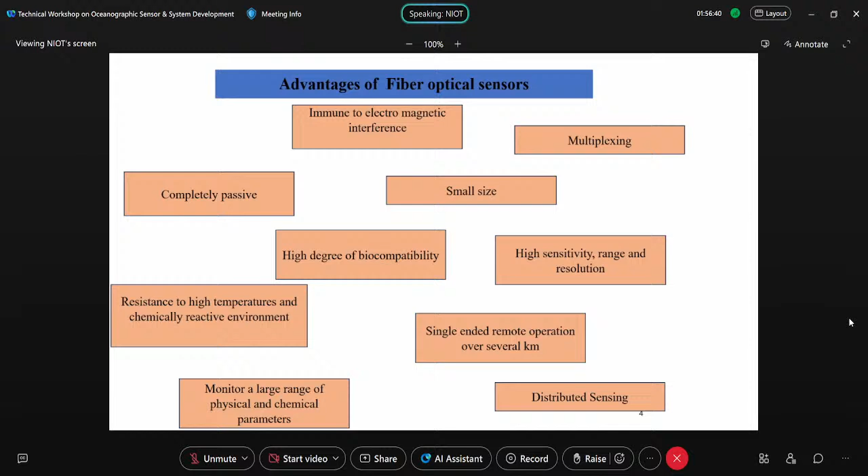Before going into that, as I said, based on the properties which we are changing—either the phase of the light, intensity, or wavelength—we can classify it: phase modulation, intensity modulation, wavelength modulation. Before going into that, there are two basic types: extrinsic and intrinsic. Extrinsic is where fiber optics are just used to carry the sensing signal, whereas in intrinsic, the sensing itself is fabricated inside the fiber. That is the basic difference.

I'll move on to the basic interferometric sensors. This is based on creating interference. This is the basic property of light: whenever light passes through air, for instance, it has some refractive index. When it's any other material, for example a mirror, it has another refractive index. Then part of the light gets reflected and part gets transmitted. Because of this, we get an interference pattern, and by monitoring the interference pattern, we can observe an interference fringe.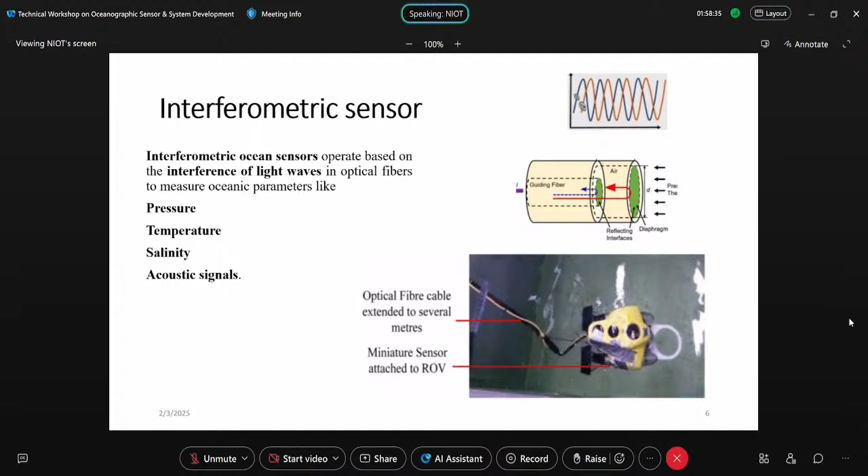At the end we have a pressure sensor, so we can monitor with the help of this.

Another one is surface plasmon resonance based sensor. These are evanescent wave based sensors which are used mostly for heavy metal detection or to measure water pollution. The basic idea behind this is to make the light interact with the metal. Whenever the light interacts with the metal, it excites the cladding mode resonance.

This type of cladding mode wave is more prone to refractive index change. Whenever it encounters any refractive index change because of the analyte, it interacts. Analytes here, whenever they interact with water, give some pattern of waveform. Whenever it interacts with oil, it gives some other pattern because of the change in water and oil refractive index. That is the basic main idea of SPR based sensor. These sensors are mostly used for oil contamination with water and any other heavy metal detection.

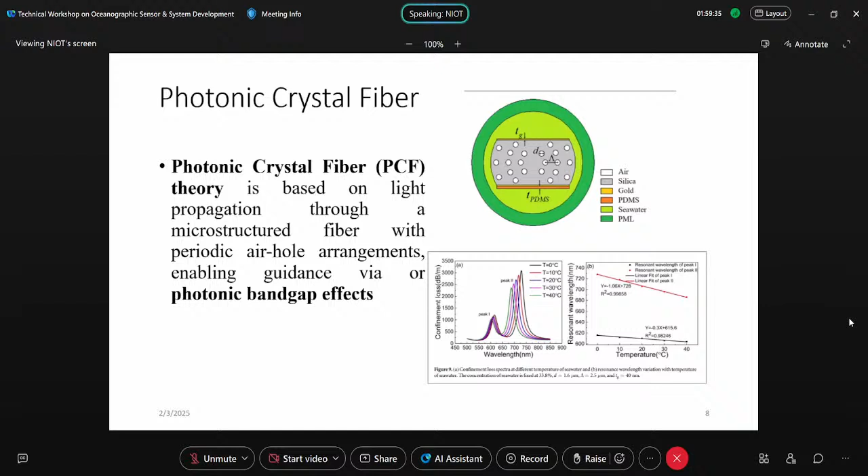And this is photonic crystal fiber. This is also achieved by making a change in the optical fiber structure, we can achieve the photonic crystal fiber structure.

Now move on to fiber grating. As ma'am already said, because of imperfection. What is the imperfection here? Here, imperfection is in terms of RI, the refractive index. Usually we know core and cladding - core has a uniform refractive index over the length and cladding has some other refractive index over the length. We are going to make a periodic change in the refractive index of the core at some periodicity.

This is the major idea behind fiber Bragg grating. This is sometimes called a filter. It filters only one wavelength and returns it. How does it filter a particular wavelength? This is because this periodicity, this change, should be periodic over the grating length. If it is non-periodic, we can't get the single light at the transmission or reflection end. Whenever we have periodicity, that too in the range of the wavelength we have used, that is the Bragg condition.

If I want to use 1550 nanometer, my periodicity should be half of that. By having the particular periodicity, I can get a particular light reflected. Here I am getting only one reflected light.

And this, because of thermal expansion and thermal optical property of fiber, even minute changes in temperature cause the optical fiber to get expanded. Because of this expansion in the fiber, there will be a change in the periodicity. Because of this change in periodicity, my reflected wavelength gets shifted, a red shift. This is the basic or major idea behind fiber Bragg grating.

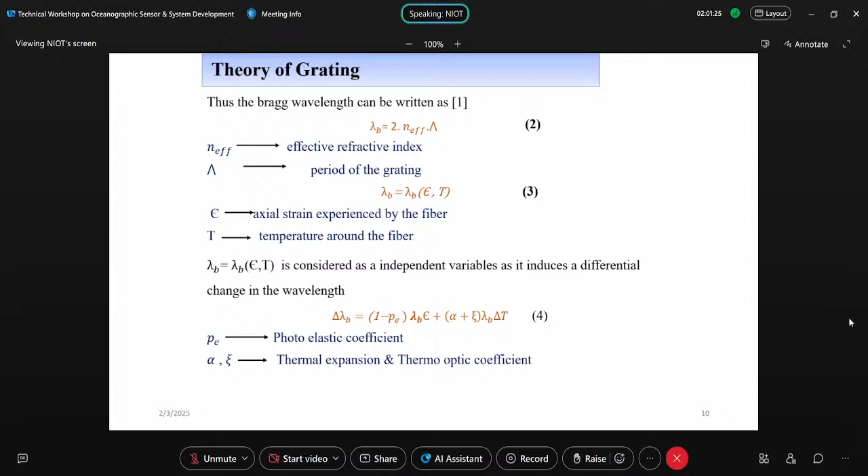One more beauty of this fiber Bragg grating is it is inherently sensitive to temperature and strain. It doesn't respond to any other parameter. But we can make, just a minute, yes, but we can make an array of sensors to make the particular FBG get

prone to other environments. For example, here I am using a polyimide coated FBG which is sensitive to salinity, and I make an acrylate coated FBG which is sensitive to temperature. So within a single fiber, with a single source and a single interrogator, I can measure two parameters. Here I am saying 2 parameters, but we can extend up to 5 to 10 parameters based on the broadband light source we use and the interrogator we employ.

Apart from this, one more advantage with respect to FBGs is we can easily hybridize them with any other technology. For example, here, this is for a humidity sensor. FBG is used for temperature monitoring, but it is not prone to humidity. How can I implement humidity with the same structure? At the end of the fiber, I can implement a coating, like PAA coating, which is very much prone to moisture. Whenever it absorbs the moisture, it gets expanded.

Because of expansion, as I said, the interference pattern gets varied. So I can monitor with the help of reflected wavelength and interference pattern. I can observe the change in temperature and humidity.

The another point is how we can make a multiplexing here. In the last one, I have used temperature, salinity, and pressure. As initially said, there is an FBG which has two sets of gratings. One is prone to only temperature. Another one, with polyimide coating, I can make it used for salinity, with the hygroscopic material. So with the FBG, I can measure temperature and salinity.

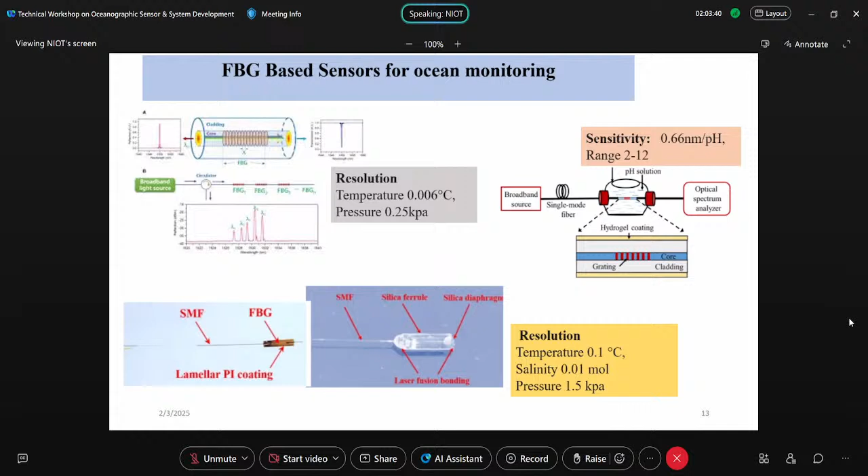These are a few in situ trials where an array of FBGs are fabricated in a single cable and deployed with the help of a source and interrogator. We can measure, as ma'am has already explained.

This is one more proposal from my point. We have an FBG, and as I said, we have only one reflected wavelength. We can monitor by tracking this one peak wavelength.

This is the tilted FBG. Here, in a normal FBG, the grating is perpendicular to the axis of the core. Because of this perpendicularity, whenever light enters, it gets reflected again in the same direction.

When it is tilted, during the reflection, part of the light gets transmitted to the cladding, so I can excite more cladding modes. The major idea behind this is that the core responds to temperature and strain alone,

but it doesn't respond to RI. But these cladding modes respond to temperature, strain, and RI. One more advantage is how the cladding mode's response to temperature and strain differs, so with a single structure, I can overcome the cross sensitivity problem. That is the major idea of tilted fiber Bragg grating.

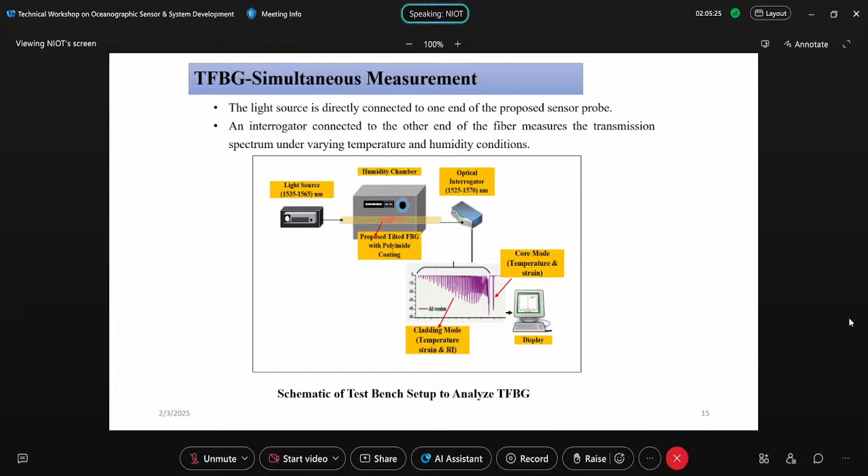So one more proposal, with just two more minutes, ma'am. With a single coating on a TFBG, one can monitor temperature as well as salinity without any cross sensitivity challenge. That is the major idea of my research work.

And this is actually what I have done for humidity and temperature. From the graph alone, we are not able to distinguish how the cladding modes differ, but by using machine learning algorithms, here I am using a few regression algorithms.

I have trained the regression algorithms with the transmission spectrum observed for different temperature and humidity values. I keep training the regression algorithm, and once given a particular transmission spectrum for a particular temperature and humidity, it gives the temperature and humidity based on the training.

And I am getting errors of around 0.1 degree Celsius for temperature and 0.1% for humidity. That too we can make even better by using a better CNN algorithm or deep neural network. I have used just the machine learning algorithm alone, and for that itself I can get these results.

This is one more advantage: we can use a single coating material, and with a single fiber structure, we can measure two parameters. One more point is this regression algorithm flow, and these are just the conclusion of the optical structure which I have used.

Recently, many research works are carried out on optical sensors, but very few are under sea trial. Many prototypes and beautiful research works are already done. So further continuation of sea trials obviously depends on funding to go on.

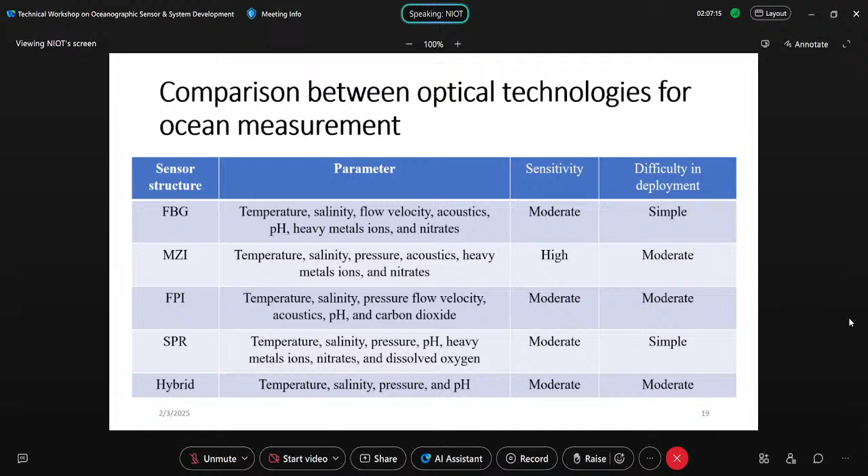With more practice, as an institution, we can get only one optical fiber or two with the funding available. But for further experimentation to go on, we need a number of FBGs, or we need optical fibers to work with. That's all, thank you.

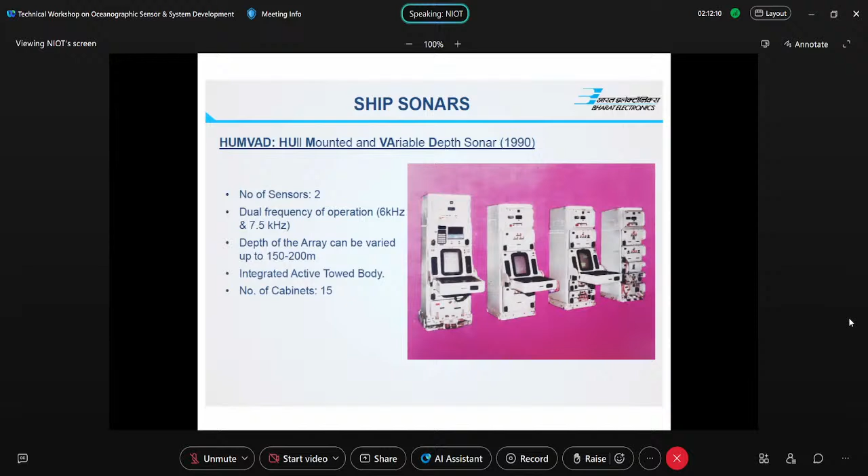Next was the variable depth dunking sonar, where we had a fixed array that we could lower to a variable depth, as well as a towed array for passive use. This is another version of this.

These all belong to the ship sonar category, where we had two variants, high frequency and another, because depending on the class of ship, the space availability, and the configuration the Indian Navy wants, our systems were progressing. Also, there were changes in obsolescence, changes in electronics and the latest trends, so our electronics and cabinets were also evolving. This is our latest. These are our products.

Coming to submarine sonar, here we have 5 sensors. Compared to surface sonars, submarine sonar is actually the eye of a submarine, because in case of a ship, at least you have a radar or some other means of communication. But when a submarine is dived, only sonar is available. You have active sonar, passive sonar, underwater telephony, obstacle avoidance sonar, and intercept sonar.

Active sonar, generally we don't use during normal operation, because the general purpose of a submarine is to be silent. This is used only in case of emergency, where a ping is used to inform other ships for rescue.

The second one is the passive sonar. This is the main eye of a submarine, because without which a submarine cannot navigate when it is dived.

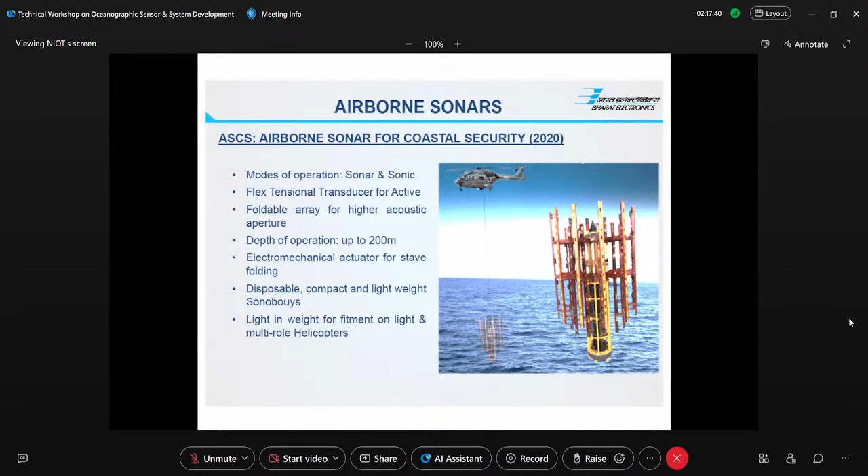Next, one more thing is this linear array, because generally there is a restriction when you use a hull mounted sonar, which is the standard one used in almost all classes of ships, frigates, destroyers, and others. But there is a restriction with respect to inputs like XBT, where people are expecting XBT and CTD data for sonar operations.

So when we are lowering it, with respect to the sound wave propagation law, the same principle applies here. Whenever we are positioning a fixed array, with respect to that, can you shift to the next one?

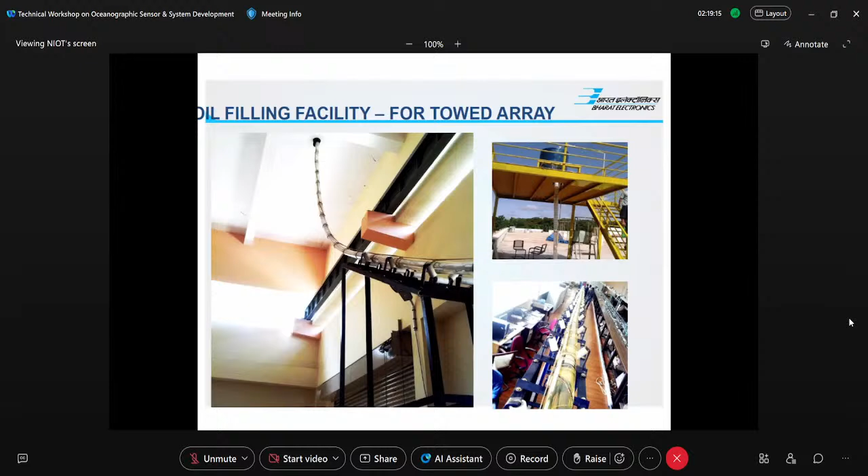Next, similarly, these are the transducer manufacturing facilities. Next, so this is a towed array. Towed array facilities, oil filling, vacuum. This is a neutral buoyancy test.

Okay, so we have a facility to check this, because since our sonars are operating at a maximum of about 400 meter depth, we have a testing facility up to 45 bar. Next, so we have an acoustic tank facility for taking acoustic measurements inside our factory, because our numbers here are high.

Next, so okay, now, major challenges. This is what I wanted to focus on here. Generally in the design of sonar, what are the major challenges faced by a production agency? I just want to explain this.

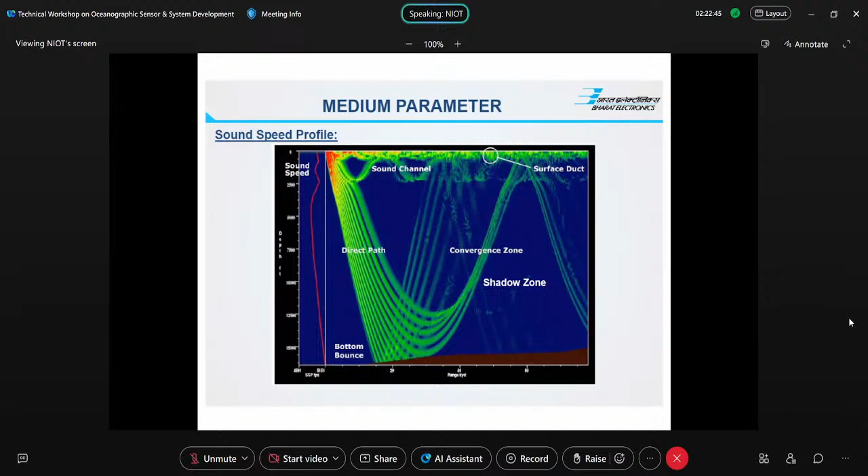So there are many problems because, unlike air, water is a tough medium. To understand all these things, more than the sensor itself, all these parameters play a heavy role in the design of a sonar.

These are the constraints as far as the platform is concerned, because if you want a 1 kilohertz transducer, the size of your array will be somewhere around 4 to 5 meters. Such a heavy item you cannot carry on a ship, so we design different varieties. These are the things, given the shortage of time.

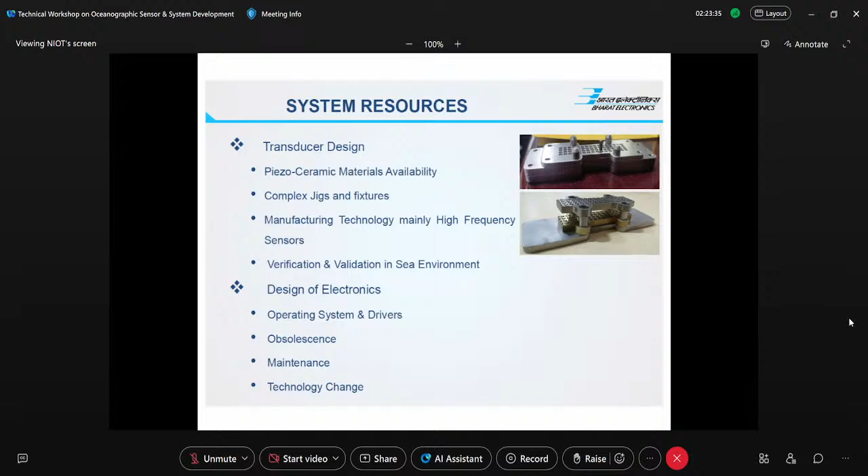These are some of the constraints we have. From hull mounted sonar and conventional arrays, we are now moving towards mine detection and torpedo detection in active mode; this is a new focus area. Second, the towed array, moving from a single line configuration. These are the improvements we are planning over the course of time.

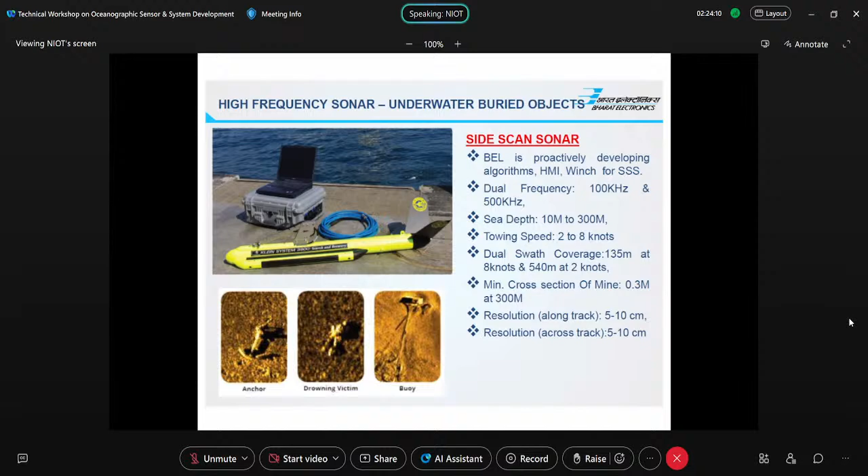These are some products we are currently working on: side scan sonar and navigational sensors, mainly echo sounders and DVL. This is a diver detection sonar, which we are mostly developing with NPOL. These are other underwater target training targets. The sub-bottom profiler, we are working on with NIOT. And this is the tide level sensor.

This is the quality assurance plan we generally follow, because you cannot aim for quality at the end of the product — it should start from the beginning of the project. So these are all the steps we follow when we take up any new project, starting from the design phase through to product support.

You can go through my presentation for these details — hardware design, software design, and design validation. Thank you.